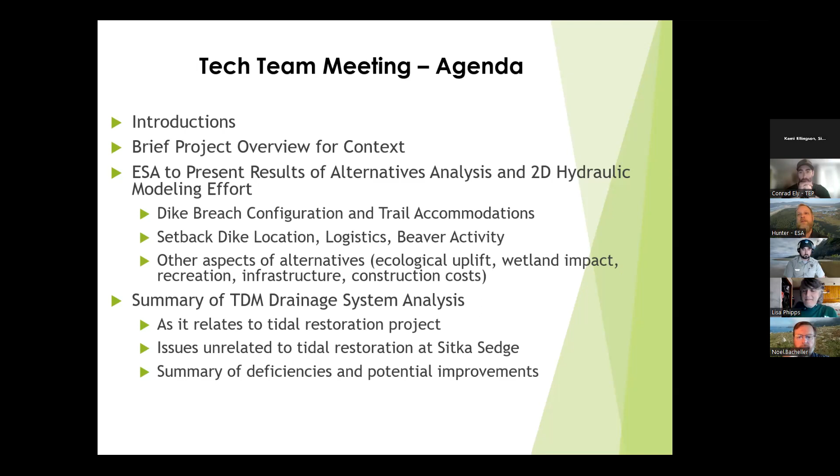We'll also cover other aspects of these alternatives, ecological uplift and impact associated with them, how they affect recreation at the park, how they tie in and affect other infrastructure such as Sand Lake Road, and some rough concept level construction costs for a basis of comparison.

We've also performed a fairly detailed assessment of Tierra del Mar's drainage system, mostly to understand flow inputs for our hydraulic model, but also looking more broadly at some of the flooding and drainage issues that residents experience, and really to show how some of those are related to Sitka Sedge, and how a lot of the drainage issues further south in Tierra del Mar are not related to restoration, but want to look at this as a comprehensive project planning effort.

So like I said, I'll be going through this pretty quickly. Again, let me know if you have questions, and otherwise we'll have some pause moments to discuss.

The purpose of this project is really around the fact that the existing culvert and tide gate and dike are failing. The culvert, there once was a tide gate on this 4x4 concrete box culvert. The tide gate is completely missing now. There's also significant erosion, mostly around the culvert itself, but in some other locations.

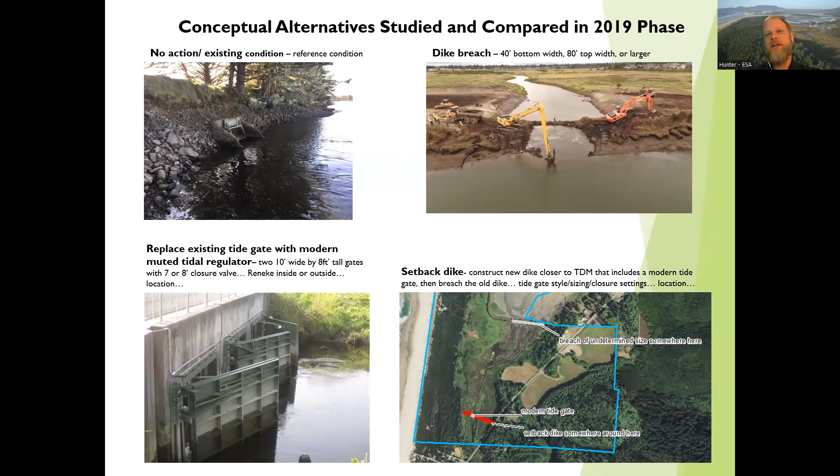We have previously studied at a high level some of these alternatives: the no action alternative of letting the tide gate deteriorate on its own, breaching the dike, a modern tide gate system, and a dike breach scenario with a setback dike in place.

The real purpose of this phase of work has been to advance the level of modeling used. Previously, we used a hydrologic budget model, known as the bucket model. We've now developed a 2D hydrodynamic model using HEC-RAS, and we're looking to refine the locations and details of key elements, namely the dike breach and the setback dike location.

We'll also look at additional potential site enhancements, such as tidal channel creation, filling some of the ditches, vegetation enhancements, and noting that Sand Lake Road has 3 culverts at Reneke, Beltz, and No Name Creek that will ultimately be replaced as well, but that's not directly a part of this study right now.

And as I said, we looked at Tierra del Mar's drainage system, really as a look at how we input those flows to the model, as well as identifying some potential improvements that could be undertaken in the future.

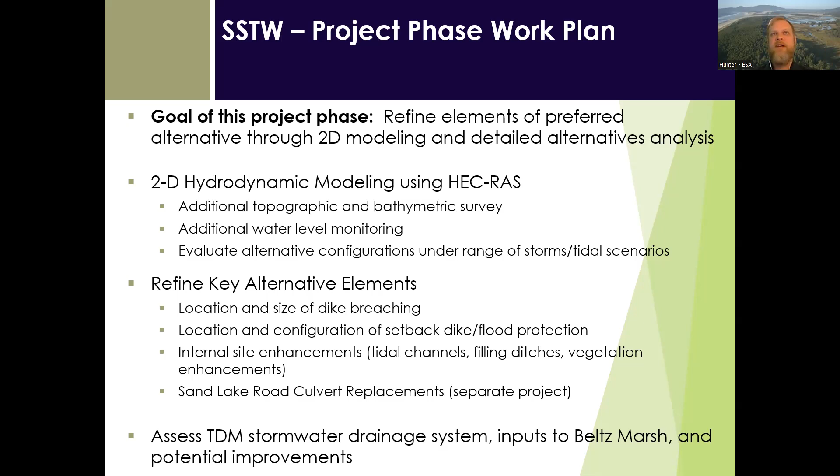Zooming out here on our concept plan, we'll be stepping through the presentation in this manner: first looking at the dike breach locations and how to maintain the Beltz Dike Trail, or the connection out to the rest of the trail network.

And again, looking at different locations for setback dike improvement at the south end of the marsh.

I'm going to go ahead and share some of the conclusions here up front. We've got a lot to talk through, but wanted to give some of these summaries up front so you all can start thinking about those, and really just not bury the conclusion here.

So what we've looked at out here on the outer dike is a 100-foot wide breach at the top, a 200-foot wide breach, and then full dike removal, really looking at a range of different ways to reconnect the marsh.

But noting that each one of these breach configurations needs some accommodation to maintain the trail. The Beltz Dike Trail is currently connected to the existing trailhead and parking lot and provides access out to the whole rest of the trail network.

These two 100-foot and 200-foot breach options could feasibly be spanned by a pedestrian bridge and really just leave the dike trail where it is.

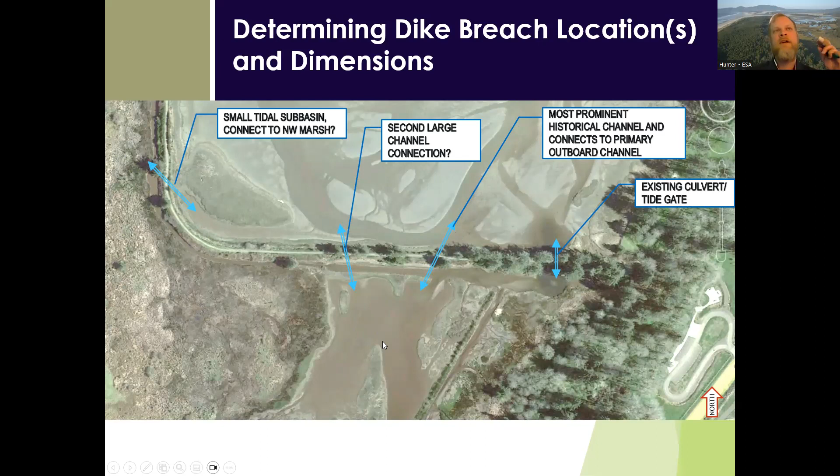We do see further to the west potential to do some smaller reconnection in the marsh, but a lot of this northwest marsh area does drain towards the center. So I'll show you a couple different views of how that will flow and function, considering additional breaches.

But again, really getting back to that question of predictability, and if we invest this money in the infrastructure, how to make sure, or how to protect it and minimize impact to it.

So stepping as far back in time as we could from a historical aerial perspective, we still see these 2 prominent channel connections that were covered by the dike, and again this eastern one really lining up as the primary channel.

Just a little more zoomed in view here. And then looking again at how the existing culvert and tide gate location is offset and not really aligned with what would be the primary trunk of this channel network.

Between these 2 - and this is getting into that question of multiple breaches and multiple bridges - York, your comment about removing the existing tide gate and culvert and spanning that, I think that's even more of a location where, if we had one bridge over the existing tide gate and another one at our primary channel, there's some risk in one of these locations filling in more and one of them scouring, so less predictability or more risk of changes occurring.

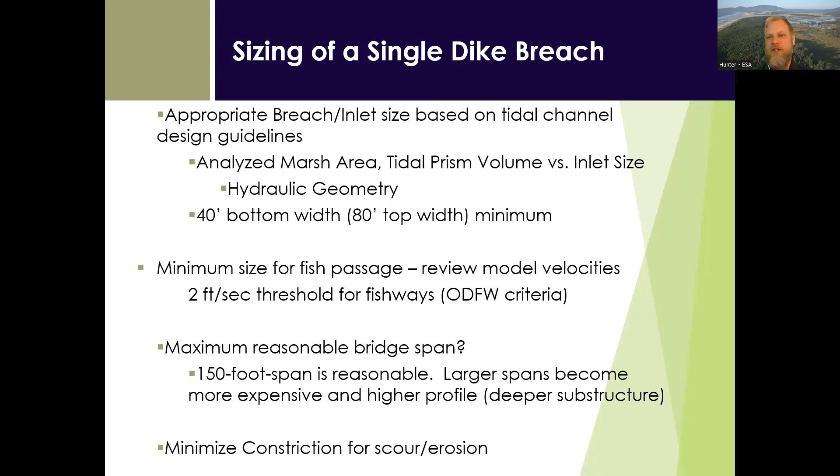Couple questions, Hunter. Yeah, go ahead. Cool. Chris, or York, go ahead.

Just one clarification, back to the levee breaches - I just want people to consider that a levee breach doesn't necessarily mean a channel. You're just removing fill, and you could put that area back to whatever natural grade it was without it being an actual active channel. I definitely get Hunter's point about stability and predictability, but I just wanted to keep it in folks' mind that a dike breach doesn't necessarily mean there has to be a flowing active channel through that location. Thanks.

Yeah, thanks, York. Chris Knudsen - Hunter, can you go back a couple slides? Yeah, that one right there. So I was just curious, there's a linear feature to the right of your arrows, your channel arrows.

Yeah, what is that? This is the drainage ditch that starts to show up really prominently in the 1950s aerial photos. That has been changing throughout the years with some of the ditching that has occurred, and how it's related to the timing of the dike. The dike was present in the 1939 aerial where this ditch really wasn't - I guess you kind of see the start of a ditch here - which kind of disappears in the 50s aerial, and then in the 70s aerial there's a more prominent, deeper ditch, not in this same location, but yeah, it is essentially a drainage ditch that's been cut, and we see that across the site.

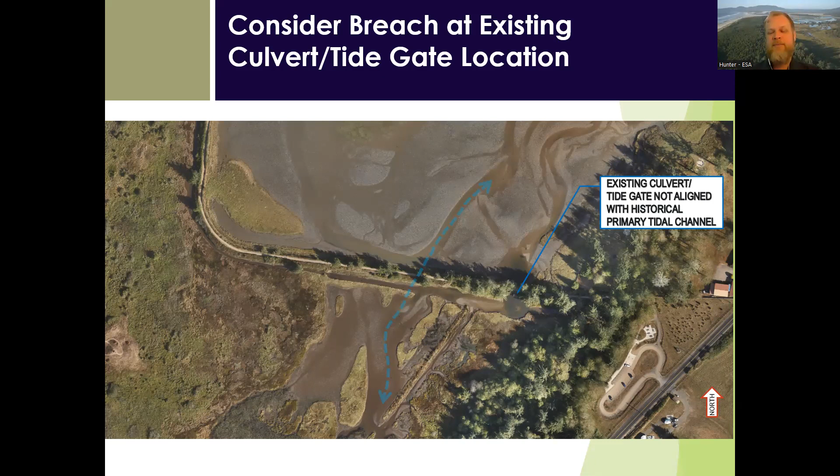No, I don't believe so. Like I said, if I could try to overlay these a bit better - there is a ditch network that kind of tees or comes together roughly where this road is, but then there's a ditch segment that continues to the north where the beaver dam is, a little bit further downstream to the north of this. So where would that road be in relation to alternative 1?

Here you can see a manifold of ditches all moving to the north, and then they combine into this east-west ditch that funnels them to the center of the site. I think that old road cut was right around where this east-to-west ditch line is. There's a channel segment that flows north where it's dammed up by the beaver dam, so the beaver dam has impoundment within this primary ditch and backwaters the ditch network as well. When I refer to the beaver dam, I mean the main beaver dam.

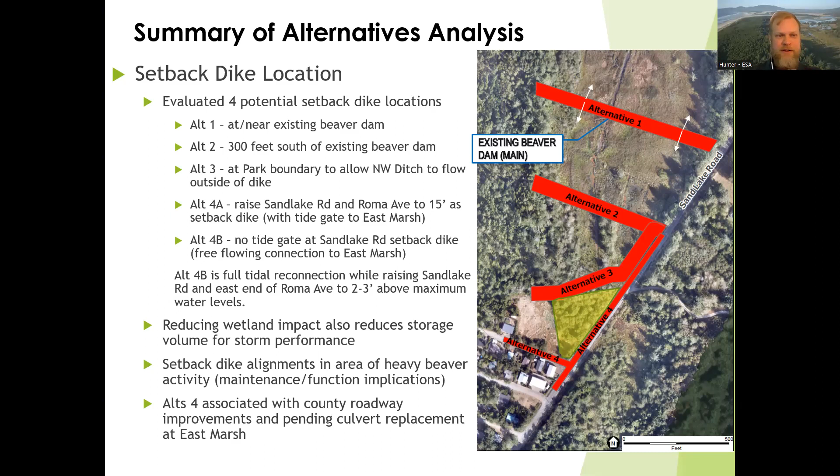While we're talking about that road, not to divert too much, but I'm curious, Jason Elkins, if this road appears in this photo. If you really zoom in, it looks like there was some sort of underpass beneath the roadway. We're pretty zoomed out here, but it does seem like there's some disturbance on this side, and apparently an underpass that would have connected into the marsh. I don't know if this was a cattle underpass moving out to the marsh, and if anybody has that knowledge.

I am not sure, it is interesting. I noted that the current residence I reside in now is not shown, or at least I can't really see it. There's a residence alongside the road, or a structure, a barn structure. But no, I'm not aware of any underpass that was there at all, or that still remains.

The old histories, the oral histories that were recorded, did indicate that there was an underpass in that location, so we do have record of that. The east side seems to have been filled in, and Malia and I were poking around there and pondering that as well, and didn't see any direct evidence of that now. Chris Lady, I don't know if you have or would be able to look into your records of any former bridges in this or nearby locations.

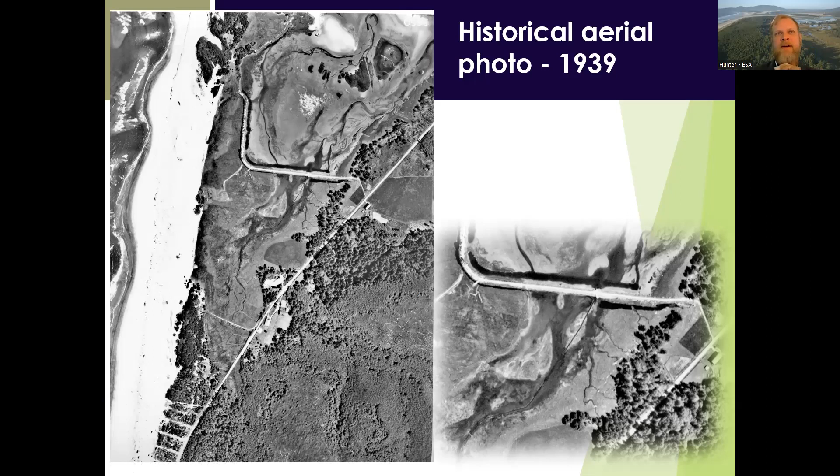York, you're making good points as far as, do you really want to fill that, or do you want to bridge that as well? And again, certainly...

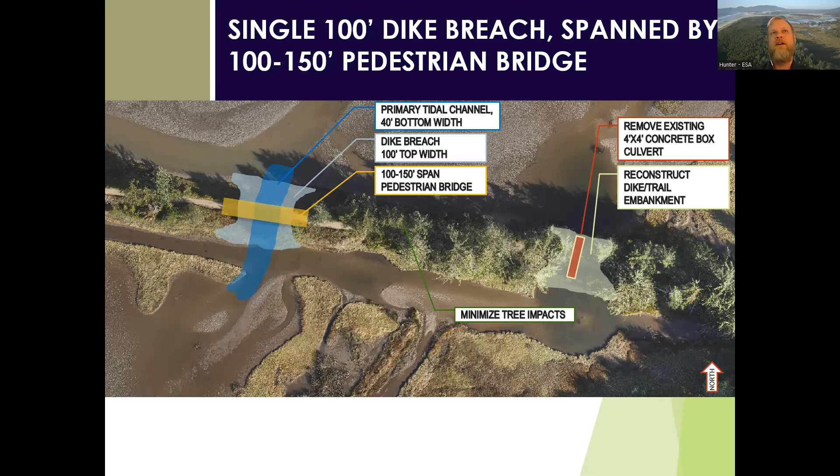Interested in hearing others' thoughts and opinions about these options as we look ahead. The predictability of nature has kind of driven our thinking on a single breach, and the ability to span it with a fairly large pedestrian bridge. These are a couple of representative examples in those span ranges, and then really looking at full removal, broad removal of the dike and allowing this to be more of a broad adjustable channel connection that could morph on its own.

But that would eliminate the trail that has been connected to this parking lot trailhead. This is what we're showing for a boardwalk option, just to start to get a sense of the scale of the cost, so we can think about the trade-offs associated with this sort of option in this location, or reconfiguring the whole trail network to run to the south around the marsh and potentially cross on a setback dike.

Thinking about where that trail would need to connect to, right now we're showing it tying in roughly to the Elk Knoll viewpoint area, essentially connecting to the trail network. A boardwalk, as I said, it's not just short span, short spacing piers that would be needed. There are some locations where we would be talking about a 100-foot bridge, boardwalk bridge over some of these channels.

And then again, comparing this to a similar system in the Nisqually National Wildlife Refuge near Olympia, where this one is also subjected to tides. You can see it's essentially out in open water during high tide, and then crossing mud flats and marsh at low tide. This is all pressure treated wood, and does have long-term maintenance implications.

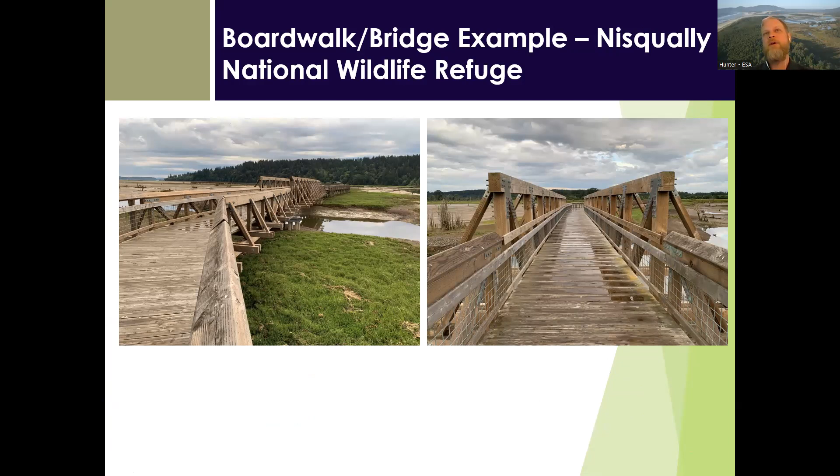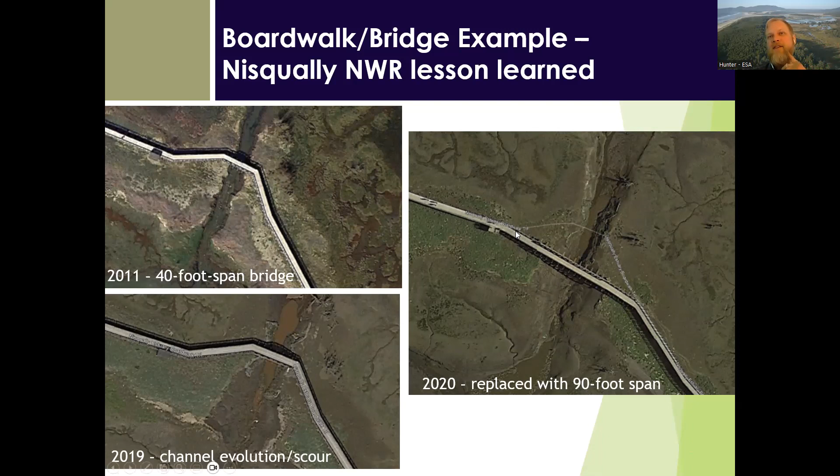This I did want to point out as kind of a caution of undersizing a bridge. This is what happened out there in Nisqually when they initially put in a 40-foot span bridge over one of the primary channels out there. 5 to 10 years later, they were seeing a lot of erosion in the channel, wanting to enlarge based on the new connection, and they have since replaced that with a 90-foot span bridge.

So again, seeing some of the stabilization measures that they attempted before upsizing the bridge, but even that, it is all wood. The bridge is a Western wood structure, and certainly has lifespan and maintenance implications in the future.

Chris Lady, I see your hand up.

So one of the things to mitigate that is typically when you do a bridge, you span right from the end of the abutment to the end of the abutment, and it is all open space.

One of the things that can be done to minimize that is you still have, call it a 150-foot bridge, but you keep 10 feet on either side of the abutment. That allows the water to do whatever maneuvering it wants to. So instead of spanning 150 feet, you end up spanning 130 feet, giving you 10 feet of buffer on either side. That helps to contain the flow.

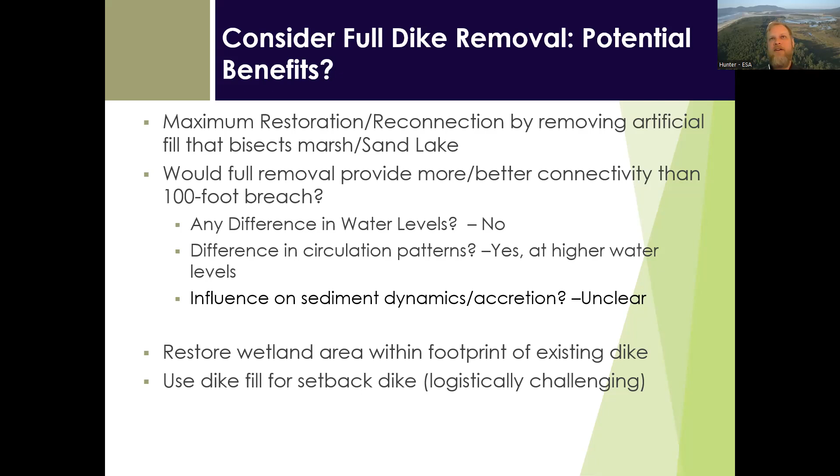York, your point about restoring wetland within the footprint of the existing dike is certainly a benefit. And is there a use for the dike fill material for the setback dike? That's logistically challenging from a timing perspective, since you'd need to build your setback dike before removing the outer dike. But in this case, because it's already connected, there are ways you could harvest material off this outer dike to build the new dike, if it were determined to be suitable.

The disadvantages of full dike removal are, the impact to the trail is the big one - what it would mean to reroute the trail, reconfigure the trail network relative to the trailhead area, parking, boardwalk, and everything that goes along with that, and really the cost.

It's hard to deny the massive difference in cost under a full removal and boardwalk option. I'll get into more of that, but for a boardwalk of this size, ranging from pressure-treated Nisqually style to PermaTrak concrete boardwalk, we're talking $3 to $5 million - let alone just excavating and hauling this material away, which is in the $1 million range plus. Compared to a 100 to 150 foot pedestrian bridge, which could be on the order of $500,000 to $1 million, depending on foundation and material type.

And then there are impacts to trees on the existing dike. If you do remove the full dike, what does that do to the potential for wind wave erosion off Sand Lake, changing fetch distance across the open water, and potential changes in vulnerability to the south end of the marsh? Kami, you've got your hand up there.

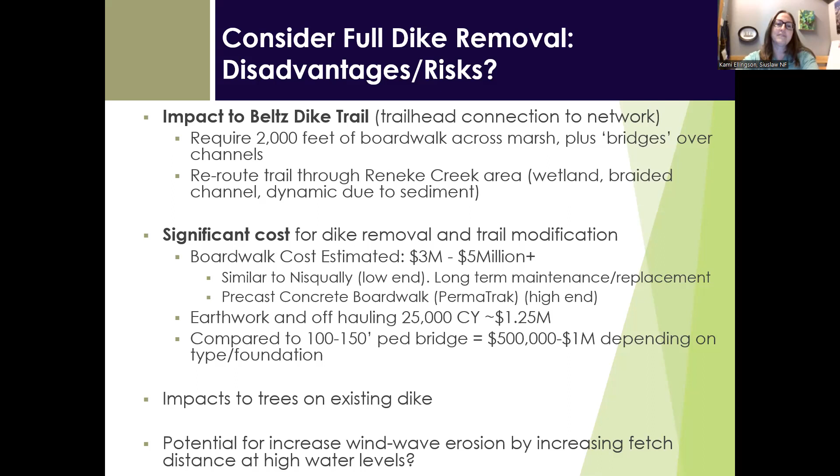So it's going to be a continual chasing of our tails to link those two. And you're going to have the same kinds of issues with the boardwalk as well, just because of how that's going to impact things, and the cost of maintaining that.

That's a good point about these two actions being linked, the full removal of the dike, with the question being how do you maintain the trail under that scenario. But I did break this down in cost for just removing the dike itself and off-hauling that material. We're talking about 25,000 cubic yards of fill comprising the dike. If we were to take it down to about 7 feet, the rough marsh plain elevation out there, that being a little over $1 million, round numbers.

But even if it's not the boardwalk replacing the dike in the location we've shown, kind of spanning the mid marsh there, if you do remove the dike, assuming you want to maintain connectivity to the rest of the trail network on the west side, you have to reroute the trails, whether that be through the Beltz, or through the Reneke Creek area. This is a very interesting zone, as Reneke Creek has moved itself down here and is sorting sediment.

Conrad and I were out there the other day seeing a ton of fish and really interesting conditions developing down there. But yes, you could certainly route the trail on high ground, or some of this would likely be boardwalk, route yourself through the Beltz Creek area and out onto a setback dike. There may be a different way to reconnect the trails, but we're still talking about a lot of reworking, likely a fair amount of boardwalks across some of these wetter areas.

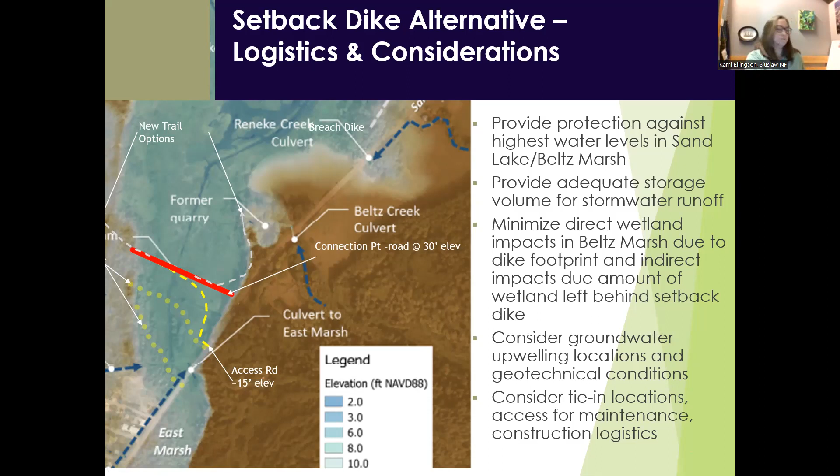I really appreciate all Kami's comments and agree. But to get back to the alternatives, something to consider: we keep talking about the cost of this boardwalk, but there's going to be a cost of maintaining the dike too, and you can't forget about that. Maintaining a structure that's potentially beautiful and not as detrimental as a levee is an easier sale than fixing a levee with hard riprap and things like that.

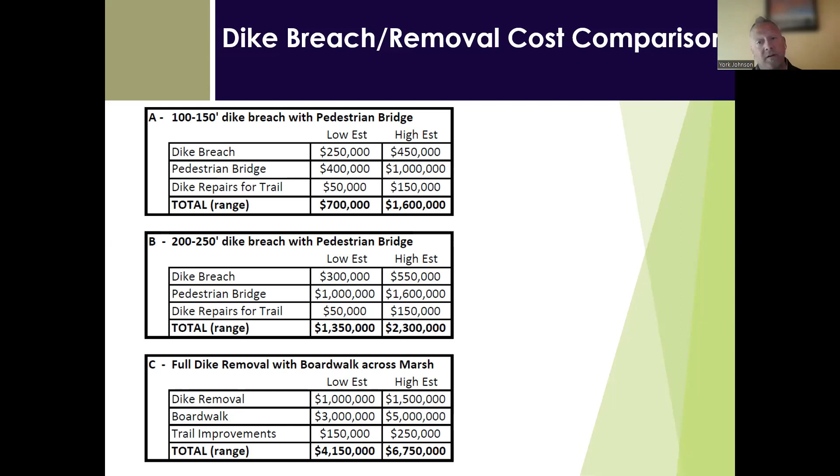Another thing I want to bring up is the levee removal and at what elevation do you stop. I noticed you put this boardwalk in a different location. Was there consideration of putting a boardwalk over a lowered levee base - maintaining the bottom 5 feet of the levee, or whatever engineers think is good, and putting your boardwalk across the old existing levee, utilizing that to a certain extent?

And to get back to Kami's point, I want to see this restored to the most natural state possible - that's really what's going to benefit water quality. If a 150-foot span bridge is reasonable, I would like that to be talked about over a 100-foot span bridge. I really like the amount of thought that's gone into the planning and consideration, but I think we should try to utilize any option we can think of moving forward.

Thanks, and just real quick on considering a boardwalk across the existing dike interface - the thought was pushing it further south to reduce its exposure. Under this alternative where we're removing the dike, this outer area where there's some rock on the outside now has more open water and wind wave action out there. I think the big thing though is the potential for the channel connections to evolve.

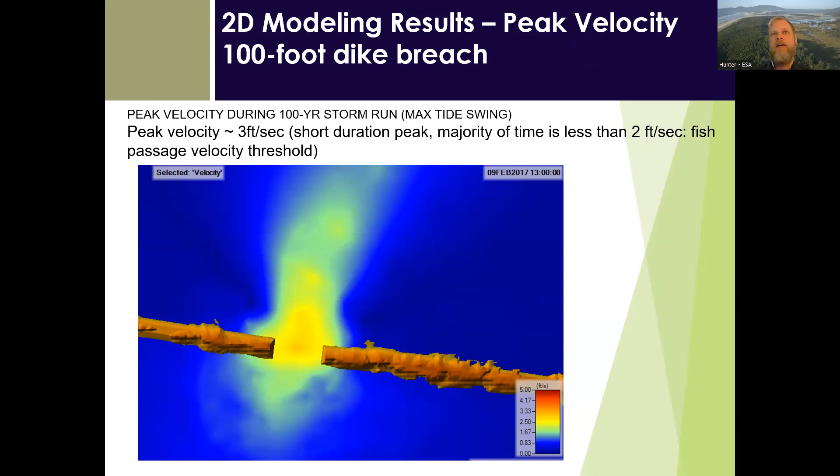What we are seeing for peak velocities under these different breach scenarios. We've changed the scale to really highlight the difference in velocity. This is at the absolute peak moment during the 100-year storm and a maximum tide swing drain out. We get 3 feet per second velocity peak through this 100-foot breach opening.

Again, when you zoom out and look at this constriction, it certainly does look like a small breach relative to the whole interface that water could be moving across, but the velocities are still quite low.

Looking at this from not only velocity but shear stress, which would drive erosion, we're comparing this to 0.19 pounds per square foot of shear stress. That shear stress has the potential to erode gravels, coarse and medium gravels.

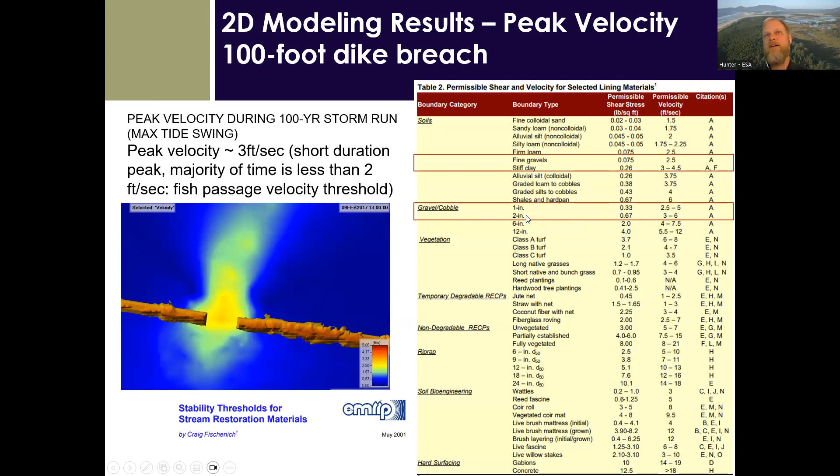As we start to get into higher velocities, around 7-8 feet per second, that's when we really start to get into riprap armoring and things like that. In the range of velocities we're talking about right now, it really has the potential to mobilize gravels, which leads us to think we wouldn't have to armor this very much, even with a 100-foot dike breach.

Looking at a 200-foot dike breach, so doubling that size, peak velocities through the opening are less than 1 foot per second, even during that full simulation of drain out.

One big factor there, as I mentioned, is that Sand Lake never drops below 5.5 feet. So we're only seeing the upper half of the tide cycle, and we really don't hit even the steepest part of a tide cycle drain out, where you often get some of the strongest forces. It just doesn't occur in Sand Lake because of the various bed features between this dike and the outer marsh, which retain water back—it never lets water fall below that 5.5 foot level.

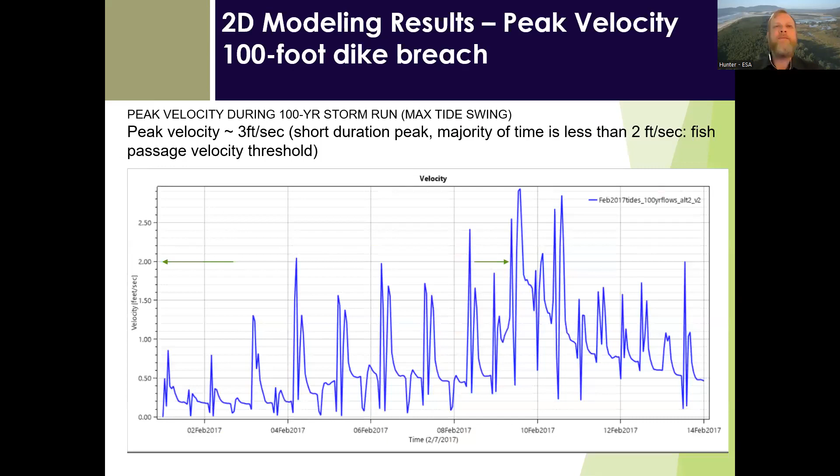Yeah, basically what I'm saying there is that the 100-foot breach itself is big enough to allow water in. Yes, it is a neck point, it is a constriction, but it's big enough of an opening that it allows water levels to equilibrate. So the water level that you see out in Sand Lake propagates into the marsh with the 100-foot breach.

For example, with the existing culvert that's out there, a 4 foot by 4 foot culvert, that constriction is small enough that we don't see the full tides propagating back into the marsh. But with the 100-foot breach, we do see full equilibration of water levels and no difference in upstream water levels in the marsh between these different breaching options or removal options.

Gotcha. Okay. I don't have a for sure answer on the circulation question, but I was looking at that and thinking about sediment movement and seeing some of those eddies that are predicted would make me think that you'd have areas of deposition, much more heterogeneous, like little bars and points of deposition behind the existing dike than you would in the full breach scenario.

But yeah, I mean, our company has done a lot of work in the San Francisco Bay, and really in a lot of these berms are actually used to slow water down and create these slack water zones that may encourage sedimentation or encourage sediment dropping out, not uniformly.

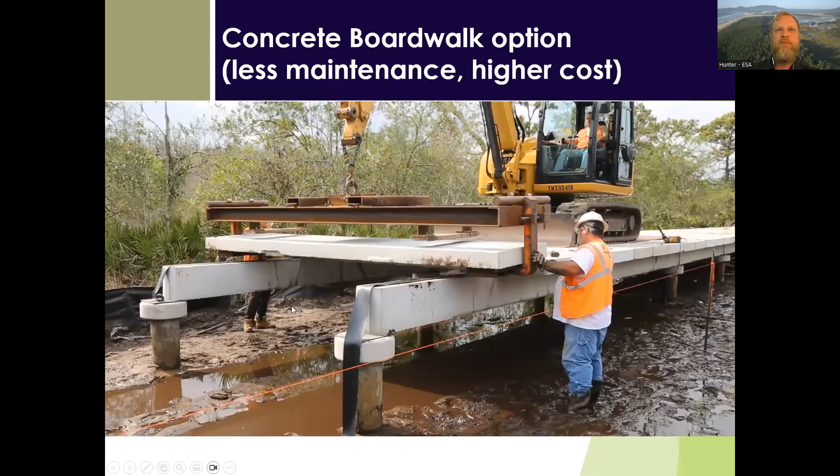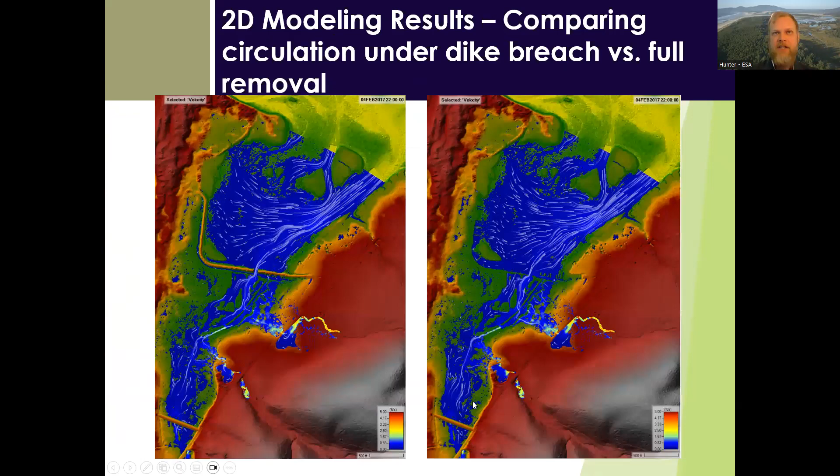Reneke certainly is the biggest contribution to freshwater in the marsh, but what we see in the modeling is that these higher water levels, even when you do have the 100-year flows filling the marsh, are ultimately limited by the outboard tide levels. The water flowing into the marsh from the tide is substantially larger than the volume of water the creeks are contributing, and Reneke is contributing the most of that.

But to directly answer your question, no, we didn't model the difference of how the dike and marsh areas would be affected by rerouting of Reneke. Once you've made the substantial breach connection, the dynamics in the marsh are really driven more by the tides, the in and out of the tides, than the inflows from the creeks. The big influence the creeks have is when there's a dike in place, or impoundments that can fill up with fresh water. But once you've made this open connection to Sand Lake, the exchange of tidewater really dominates, and the creek influence becomes less.

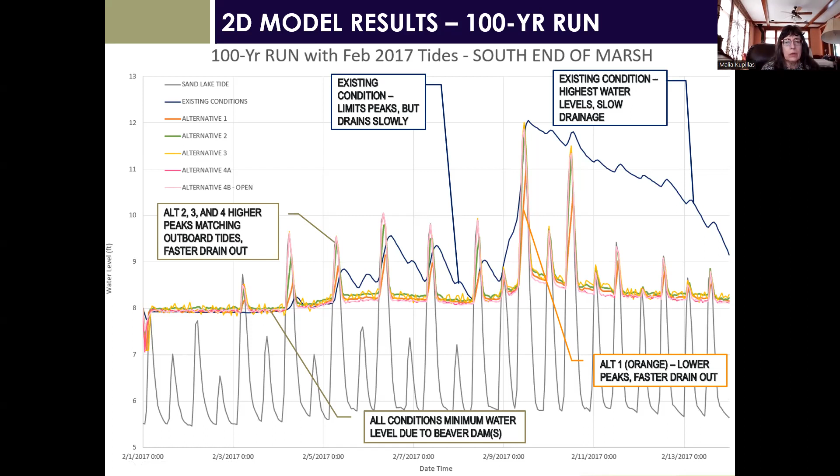Absolutely. We are looking at a separate study right now of alignment of Reneke Creek, really replacing the structure and the road overtopping that occurs there now. Working on that along with an assessment of the historical alignments of Reneke Creek, the high flow pathways, and the habitat value developed downstream of the road where it's flowing now, as well as looking at other historical options, including what I'm seeing as more of a ditched version of Reneke Creek that used to run along the parking lot and out a culvert through the dike.

But that's potentially a whole separate conversation. And again, as far as where we're talking about the setback dike locations, it's really unrelated to Reneke Creek, which I think we should transition into as I'm watching our time slip away here.

Hopefully that did answer some of your questions, and feel free to let me know if there's additional things you want to discuss or look into there.

Cami? Yeah, I'm glad I let Malia go first because mine was about Reneke as well a little bit, and then I want to go to the slide where you show the velocities with the dike breach.

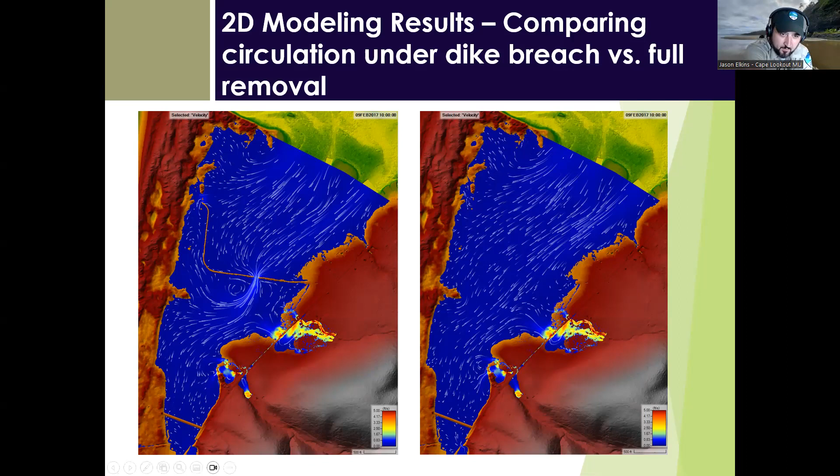Just a couple quick notes on that channel of Reneke that was created to bring the creek to the other side of the dike, the estuary side. Of note, local property owners said it would flood their property quite often when it historically flowed on the north side of the dike. So just food for thought.

And there were salmon in Reneke Creek over this winter in December. It was pretty cool.

Conrad and I were out there last week poking around this area downstream of Sand Lake Road, and we saw a ton of fish both downstream and immediately upstream. We even saw them dashing through the culvert, not apparently going much further up where we were seeing, but a lot of fish, apparently salmonids, in this area now as it's developing.

Also a very dynamic area. There's a ton of sediment sorting taking place here, and the channel really braiding out, with some beaver activity helping that along. Yeah, really an interesting area, and a whole other topic to dive into at some point.

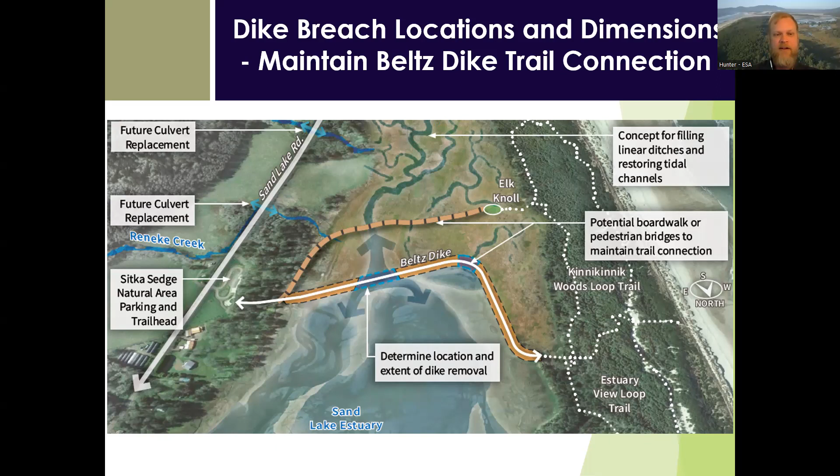In the interest of time, I know we've talked a lot about the dike breach and what happens there. I do really want to focus more of the conversation on the setback dike and what we've looked at there. I don't know if we got any indication of folks signing off at noon versus sticking around another hour, but I'll try to get through the findings and some of the other complications around this setback dike and new structure, then have additional discussion.

The big reason why I wanted to evaluate these different setback dike locations is around understanding the impact to the wetland of creating this dike, and looking at whether there are other less impactful ways to create the setback dike and have it still function the way we need it to.

So starting with this location on the setback dike, or excuse me, on the existing beaver dam. There's a lot of fine detailed logistics of whether it's on the beaver dam or downstream of the beaver dam, et cetera. But that's the location that had been initially identified and evaluated at a high level of feasibility for storage.

These other ones push the dike further south. Alternative 3 is actually configured such that the northwest ditch coming out of Tierra del Mar would flow outside of the setback dike.

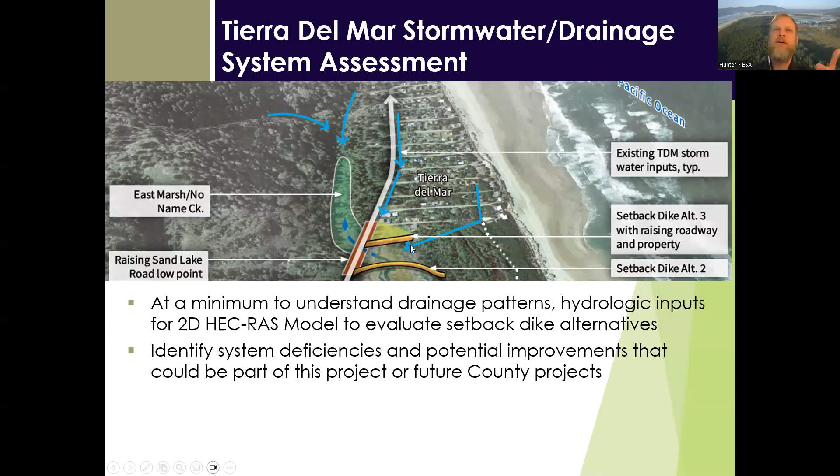Just for reference, there are some key elevations here. The 100-year flood level is 11.8. All these are in NAVD 88. Sand Lake never drops below 5.5 feet in its current state with the sand bed features. The beaver dam here impounds water behind it that never drops below 7.5 to 8 feet. So the south end of the marsh is essentially always ponded at those levels, 7 to 8 feet, depending on inputs.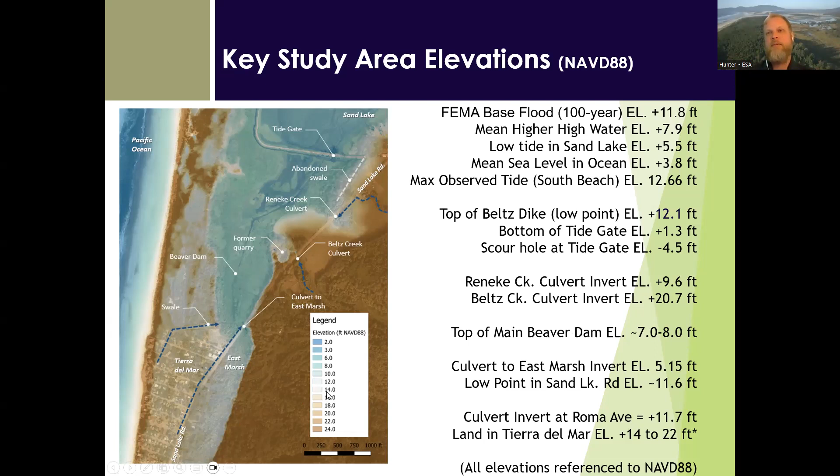And the low point in Sand Lake Road at the East Marsh crossing is 11.6 feet. So when we talk about these 12-foot tides, they would potentially overtop that low point in Sand Lake Road. When we look at performance of the setback dike, we're also looking at how much water would build up behind it and what that water surface elevation would mean for Sand Lake Road, as well as further back in the East Marsh and the northern properties in Tierra del Mar.

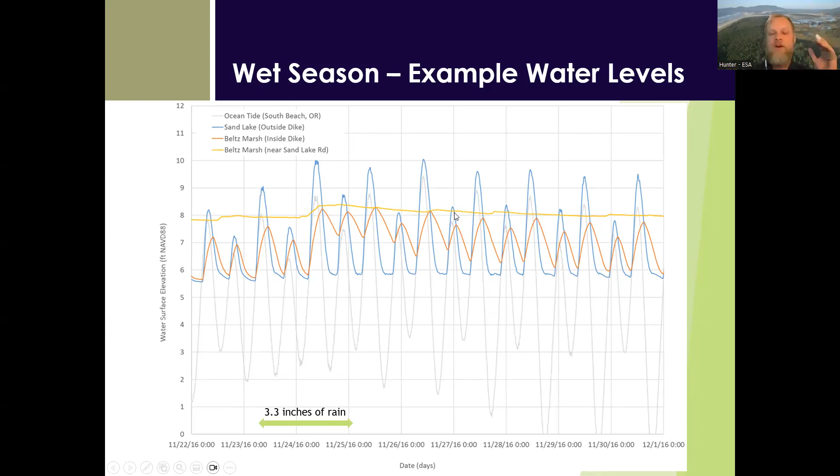Really important to note here. And then during wet season, it doesn't change that much, but what we see is with the existing dike, when we get rainfall coming in filling the basin behind the dike, it takes a long time for the system to drain out. In the same way, the area upstream of the Beaver Dam, we see small peaks, but very moderated water levels upstream of the Beaver Dam.

This is some current data from the most recent February king tides. It wasn't that exciting from a stream flow perspective, but what we did see was that we're seeing tides in Sand Lake about 1.5 feet higher than the South Beach ocean tide. So Sand Lake levels do typically get higher than the tide stations that we look at. The East Marsh, where we put in a logger, is staying steady at 8.2 roughly, and that's essentially the backwater from the Beaver Dam, as well as additional impoundment at the Sand Lake Road culvert.

We did put one more logger out closer to the mouth of Sand Lake, and it does drop further down, but it still is limited. It didn't drop below 3. So we do see Sand Lake has several bed features moving up from the mouth to where we interact with it at Beltz Dike that impounds water and cuts off the lower half of the tide cycle. That's the main point there.

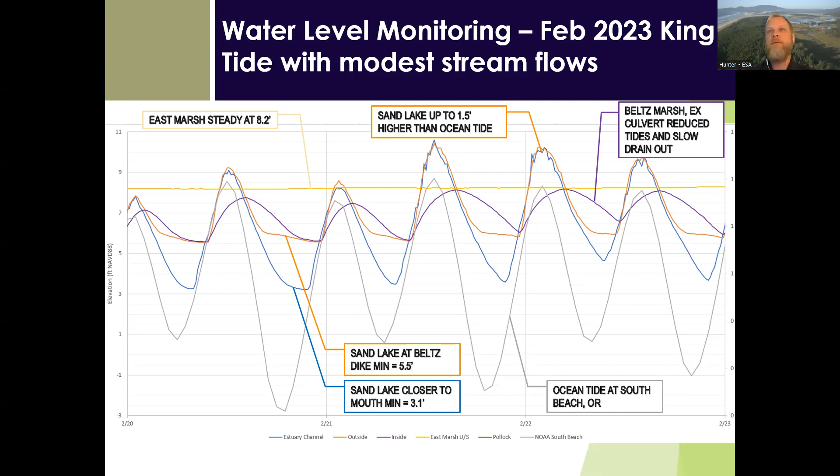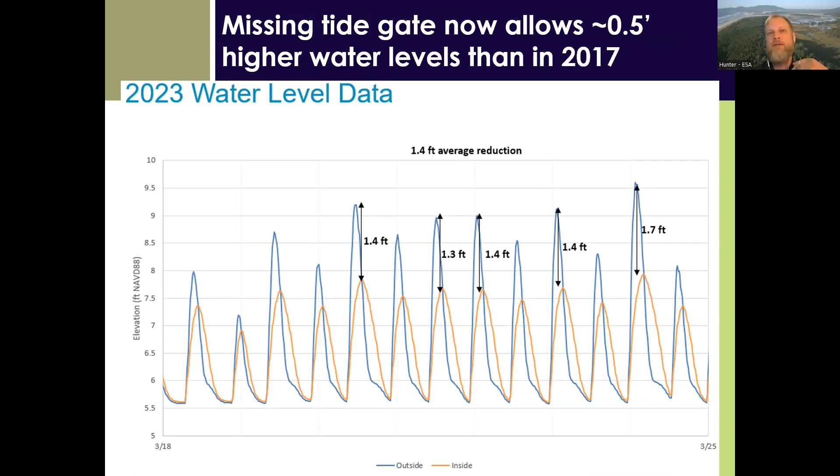Then this is just a quick analysis of the effect of the tide gate missing now compared to what it was in 2017. Back in 2017, we were seeing about a 2-foot difference in tide and water level in Beltz Marsh. And now with the 2023 water level data, we're seeing about 0.5 foot more water accumulating, or tide water getting in based on the missing tide gate. So it has changed some.

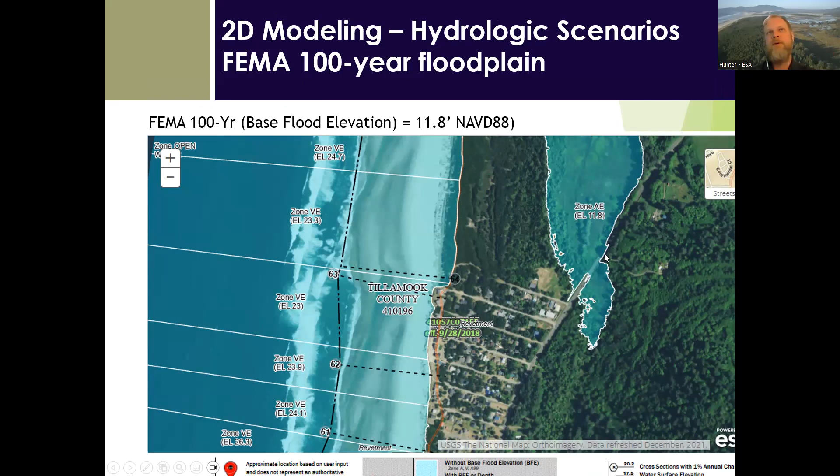I'll kind of breeze past some of this stuff. These are details about the hydrologic scenarios that were developed related to the 100-year water surface elevation. So 12 foot is this peak water level that we're really focusing on, although noting that max tide at South Beach is reported as 12.66, and noting that Sand Lake tides have been 1.5 feet higher sometimes than the ocean tide.

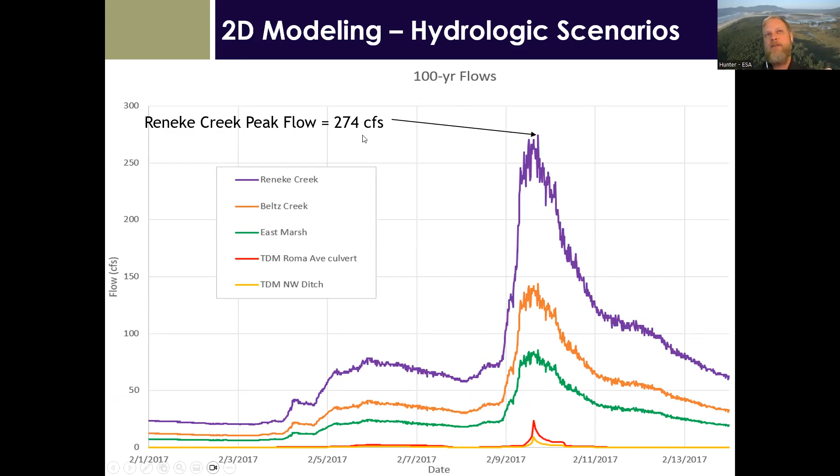13 is really what seems like the max extreme tide to consider in Sand Lake. So I'll show you a little bit about some inundation extents under those scenarios, but 12-foot king tides with all these big 100-year storm flows. We took real stream flows, we scaled them up based on nearby stream. We're tracking our Reneke Creek 100-year peak flow at about 274, comparing that to StreamStats at 238. So we may have a little bit more extreme 100-year flow event taking place, but I think it's just a more conservative approach.

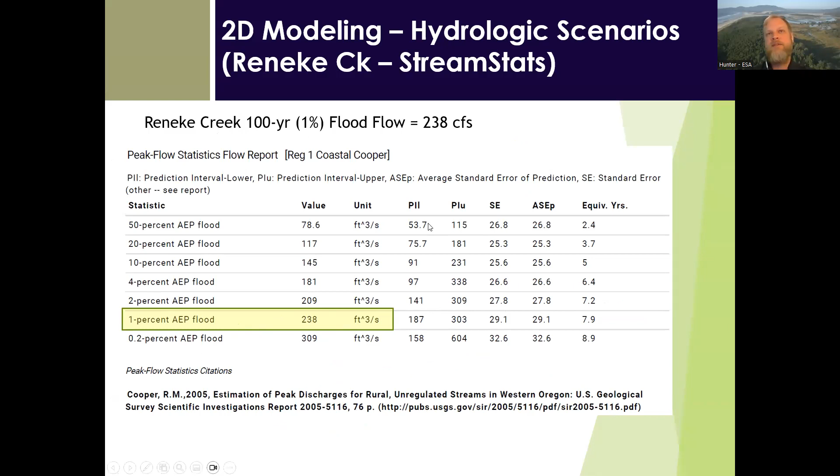And StreamStats is a rough tool, it's not always that accurate. But we do feel good about the fact that we have created this very extreme event to run these model scenarios through. Again, these are kind of wanting to compare it to existing conditions, and existing conditions, as we've talked about in previous phases, is the worst condition possible for drain out and handling storms.

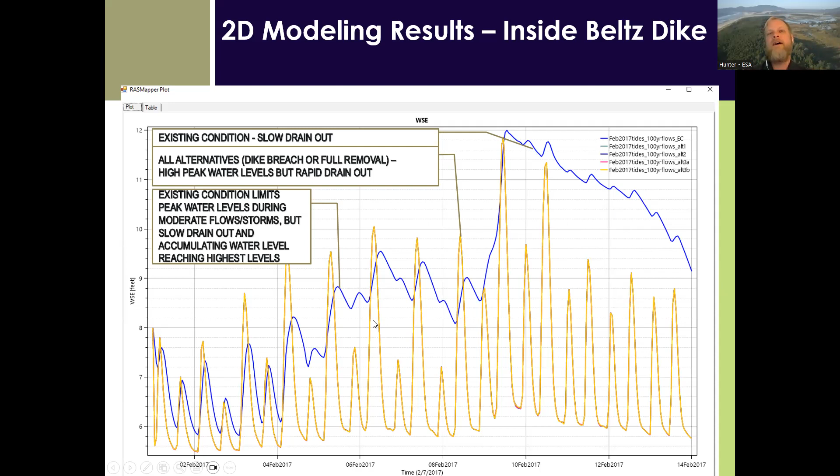What we see even leading up in this event, the blue line here being the existing condition, is that the existing dike does limit tides when there's not a storm taking place. So there is some protective value of the existing dike and culvert with no tide gate. But as soon as we start to get substantial flows, the existing condition fills with water and takes a long time to drain out, particularly once we hit this 100-year flow level. It takes days and days to drain out. So essentially all configurations that we looked at perform better than the existing condition during a big storm event.

Looking back at this earlier portion of our simulation, we see the existing conditions do limit the peaks that occur. When we compare this to the fully unrestrained, fully reconnected option, the existing dike and the setback dike, the goal of the setback dike is that it would also be limiting those peaks.

There's a lot of information here, so I'll try to hone in on this being essentially a 2-year storm, the first storm of our 100-year run. Each one of these lines is a different version of the setback dike. As you would guess, this orange one that maintains lower water levels really limits the peaks, and once the tide drops, it drains out immediately, really fast. This is alt 1, the setback dike near the existing beaver dam.

What we've seen in the modeling is that this location performs really well. In most cases, very similar peaks to existing conditions or better, as far as peak water levels. All of the options drain out very fast compared to existing conditions. As we push the setback dike further south, we reduce the volume of the storage basin, and we lead to higher peak water levels, whether it's the tide that causes that peak water level, or when the tide gate is closed and fresh water pours in, it will generate that same water level.

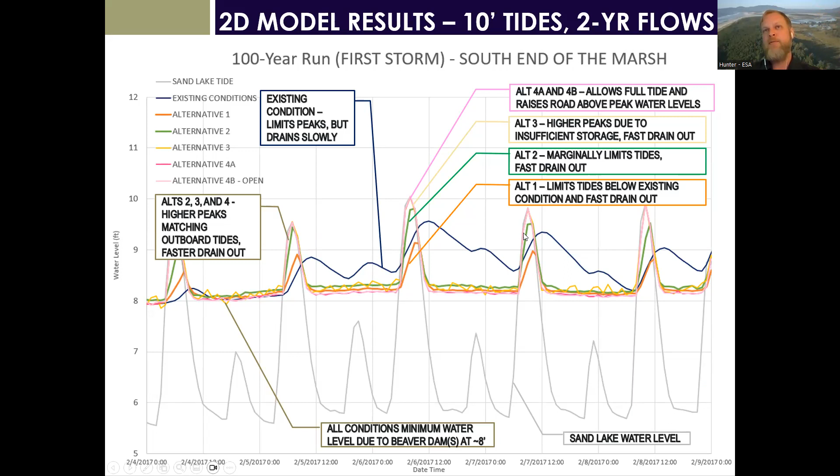When we look at the 100-year event, again it's this orange alternative 1 setback dike that truly reduces water levels compared to the existing condition, and all of the other setback dike locations fill up quickly.

Alternative 2, we've pushed it back 300 feet. It has some tide-limiting effect, but does still get higher than existing conditions in this case. As we push it further back, it's essentially allowing the full tide to occur, because the basin fills in with fresh water and results in the same peak water levels anyway.

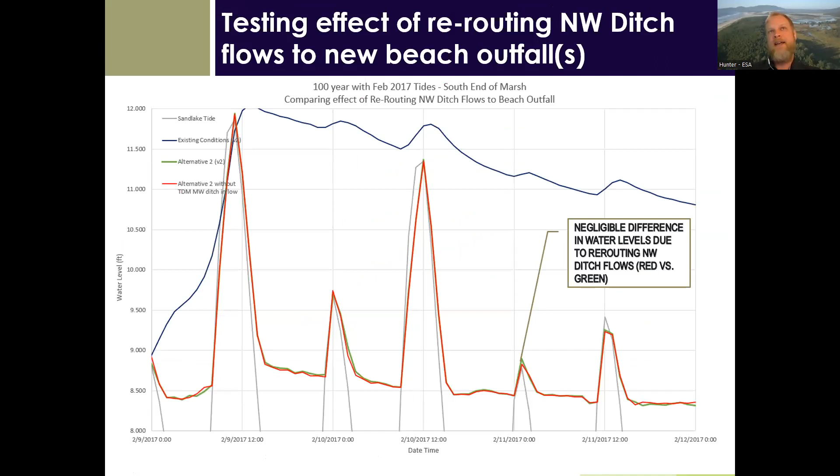Rerouting the northwest ditch has no effect. I'll go past that unless anybody has specific questions.

All the data I was just showing you was essentially water levels at the south end of the marsh, just downstream of the Roma Ave culvert, or just downstream of the East Marsh Sand Lake Road culvert. We also looked at water levels in the East Marsh, and compared to existing conditions, that shows a similar effect and even more extreme.

Water fills in this basin and just stays ponded for days and days at a time. Whereas all these setback dike options, assuming that the Sand Lake Road culvert at the East Marsh is upsized and allows exchange across that road interface, we see similar things: the peak tides occurring and really fast drain out.

The floor on all of this data is essentially the beaver dam elevation. Because of that impoundment, assuming it persists under each of these options, water levels at the south end of Beltz Marsh near Tierra del Mar do not fall below 8 feet, particularly during these big storms.

York, do you have a question?

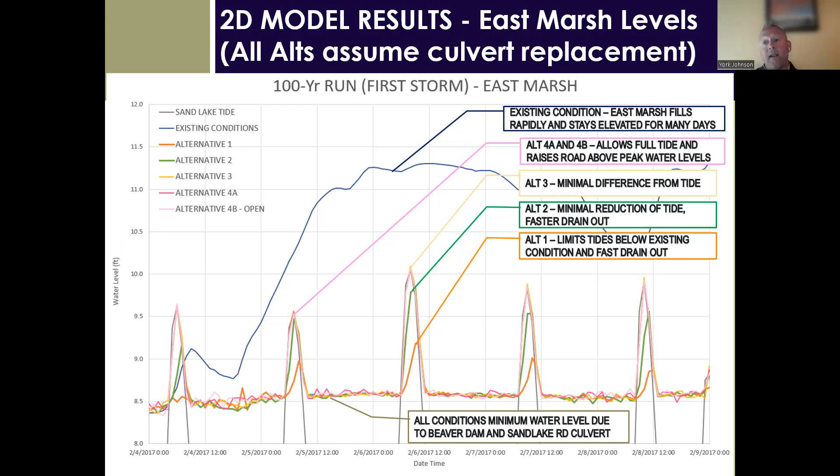I would assume you're going to set that tide gate at a lower elevation at the beaver dam. Is all this analysis you're talking about taking that under consideration, or are you not? Are you going to set the tide gate at similar elevations to the current beaver dam?

Yeah, that's a really great question and a logistical challenge, and that's what I want to get into as well. How would a new setback dike interact with this existing beaver dam? I definitely have slides that cover this, as well as the functionality of culverts and tide gates around this beaver dam and the MTR settings.

This is also a complicated question because an MTR, as folks are hopefully familiar, is allowed to close once a particular water level is reached. In this location, this is pretty unique for MTRs. We would essentially set this MTR to about 8 feet or even higher, where the gate stays open most of the time and only closes at the very peak of relatively high tides.

Getting at this topic of the elevation of the culvert, do you set that culvert lower so that it's underwater, impounded, potentially if it's upstream of the beaver dam and the beaver dam remains, it's always backwatered to 8 feet? So there's kind of this ineffective capacity. You can lower that culvert, but if it's backwatered at 8 feet, it's not really flowing at the bottom half of the culvert.

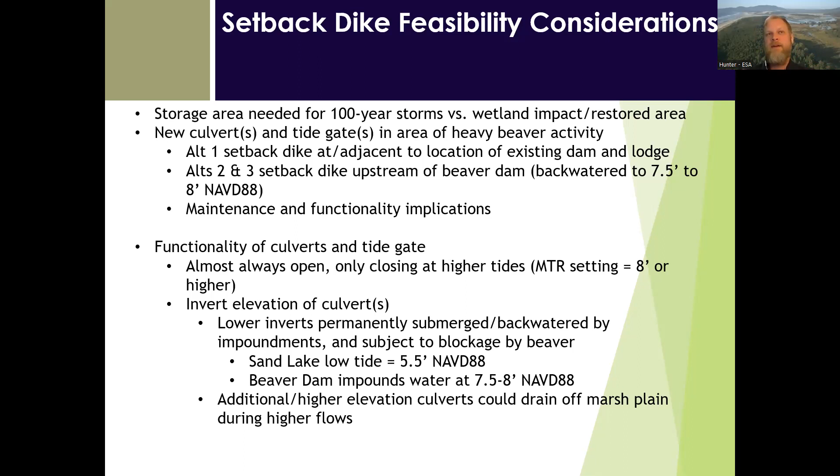That's one of the big points here: even with the amount of tide, yes, full reconnection or the breaches would allow higher tide levels and more salinity and more tide water to interact with the site. But with a lot of the research taking place in the Skagit River and in Oregon, the Yaquina and Miami River, we see beaver activity in these tidal areas that have salinity influence.

So I think we've got to assume that the beavers are going to be here after a setback dike goes in. A lot of our modeling is really focused on these extreme events and highest water levels, as far as looking at flooding and drainage capacity and things like that. So the assumption in the model is that water is impounded at these levels.

There are logistics, even in this channel here—yeah, you would likely sink your culvert in deeper so it has water in it all the time. But this downstream beaver dam is really limiting how much water can actually move through this channel until water levels are higher.

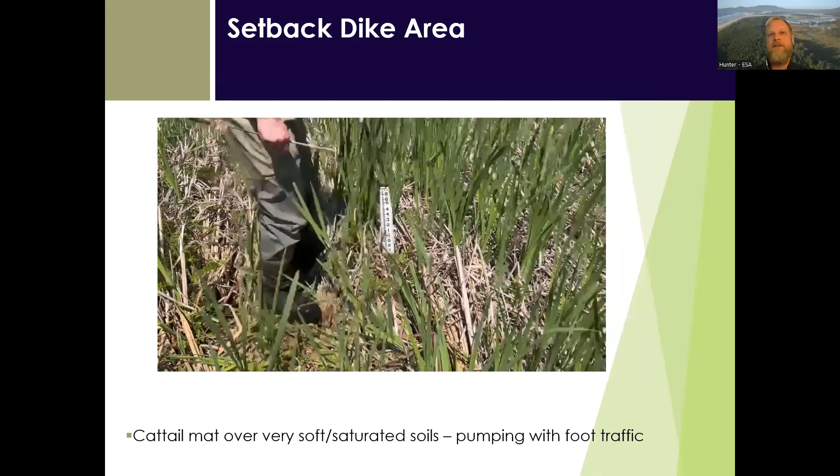So I don't know if I answered your question exactly, but yes, that's the base assumption as far as how these impoundments will operate in our modeling. But this is a big discussion that I do want to get into as far as beaver activity and how that will influence this structure in the future.

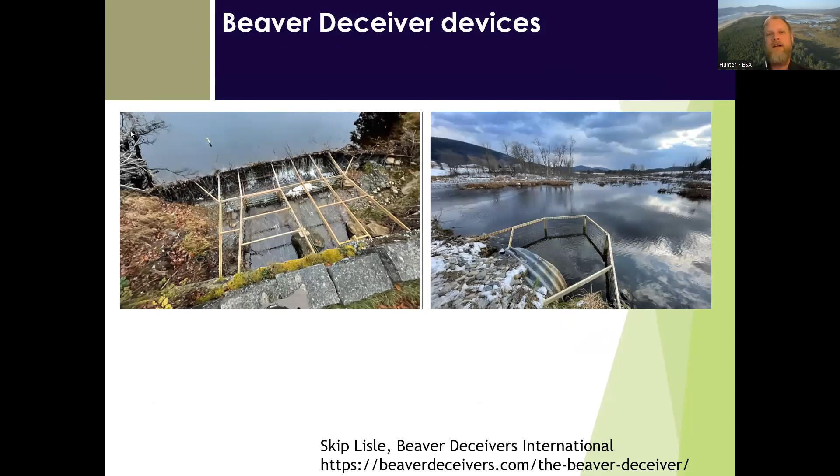Just jumping ahead a little bit, getting into what sort of exclusionary measures there are to protect a structure from being plugged by beavers. There's a lot of things being tried—giving a reference to Skip Lisle in Vermont, on the East Coast, Beaver Deceivers International, inventor of the Beaver Deceiver device. It is essentially exclusionary fencing that allows the culvert to stay free flowing and conveying water while excluding beavers from getting to the point of plugging your structure.

These are not foolproof, not maintenance free. They certainly rack debris, and beavers can essentially build a dam on this fence. I guess we need to all be aware that a setback dike, a new culvert, and a tide gate are going to have long-term maintenance associated with them to keep them flowing as we've modeled. The model is predicting full functionality of this new opening and new structure, and to make sure it does function that way well into the future, there is certainly a maintenance component.

I'll reference Smuggler's Slough tide gate near Bellingham on the Lummi Nation property. This is an MTR tide gate that stays open most of the time. It was built in a location of heavy beaver activity, and they're continuing to try different things, and honestly it sounds like kind of a struggle with it. I was talking to somebody about what they've done over time. The beaver packed about 20 cubic yards of mud around this structure to essentially seal it up, and they've done different things like adding exclusion fencing, uncovering it and clearing it out, and it's been a continuous maintenance issue for them.

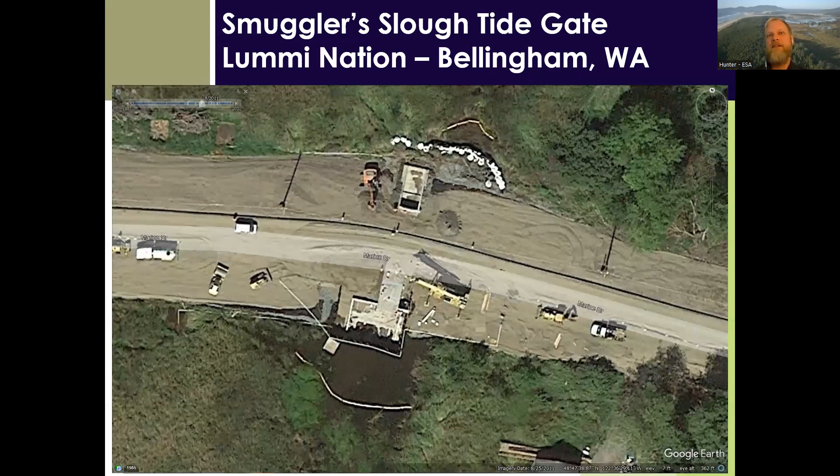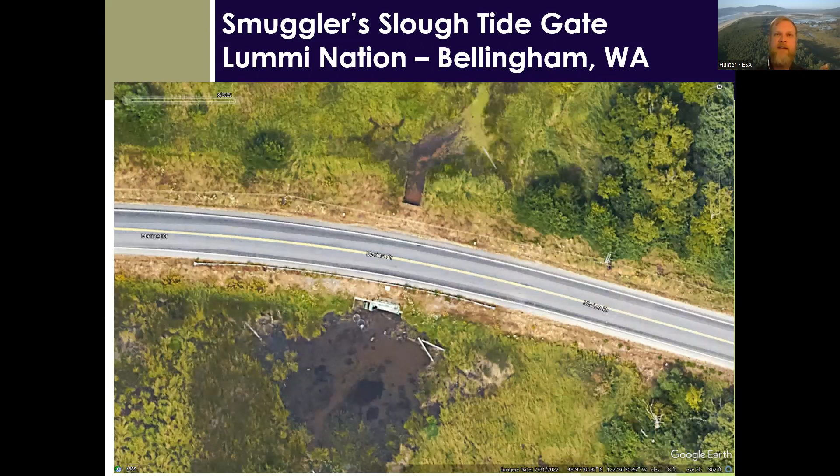So pointing that out, the setback dike location near the beaver dam has enough storage to contain all that flood water, and as long as it is maintained as free flowing, it will function that way. But there will be some effort required to keep it functional and clear. Honestly, a lot of the beaver exclusionary measures are somewhat experimental and require a fair amount of adaptive management and maintenance to keep them moving.

There's also fish passage implications for this sort of exclusionary fence. I pulled a couple of clips out of Greg Apke's presentation to the 2020 Beaver Working Group, where he talked about fish passage implications of exclusionary devices around culverts. The typical 6x6 square fencing is acceptable for resident trout. Once we start wanting adult passage through these areas, maybe into the East Marsh or upstream of a setback dike, for anadromous adult passage we want gaps between exclusionary devices more like 9 to 10 inches, and once you get to that spacing distance, beaver can move through those as well.

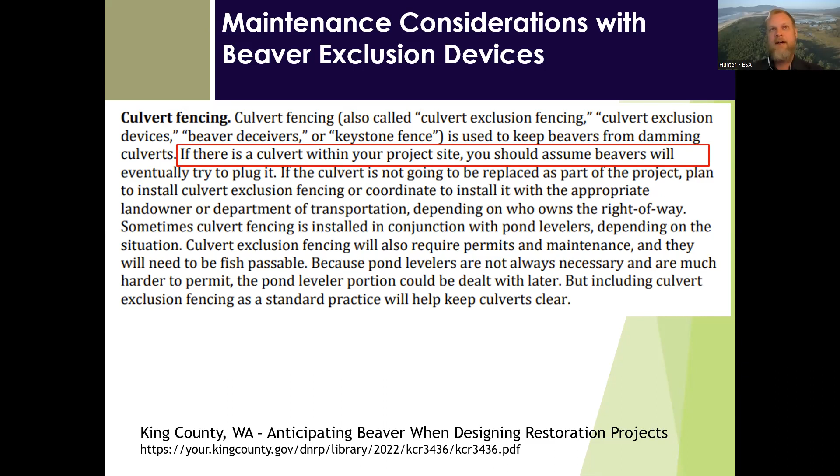Yeah, I don't want to throw you off topic, but I need a quick refresher here. So suppose we have a 150-foot dike breach in Beltz Dike and no setback levee. Can you describe real briefly what the infrastructure impacts would be from that? Yeah. So, as I said, we did look at that as kind of a point of comparison, understanding what it would mean before applying a setback dike.

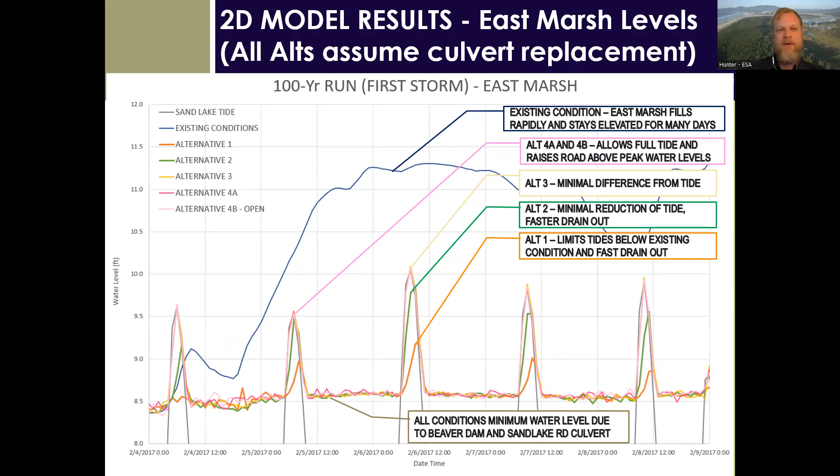So that's essentially raising up Sand Lake Road, which would overtop at 11.6 as the low point. There's a substantial portion of that road that would overtop at these higher tide levels. So what that would look like is raising up Sand Lake Road and even Roma Ave, the approach to Sand Lake Road.

I have another couple of graphics showing inundation extents at the 11-foot, 12-foot, and 13-foot water levels, which are essentially the high extremes that would occur today. You can see it inundates the eastern portion of the northernmost private property in Tierra del Mar, inundates a substantial portion of Sand Lake Road, and propagates back into the East Marsh, just starting to clip other small properties, though this more natural private property already has a lot of inundation ponded in many cases. This would essentially be the treatment where you allow those tides to occur and raise the infrastructure to handle that.

To very roughly paraphrase the groundwater modeling work from the previous phase: groundwater would actually have either negligible difference or slightly lower levels, because the existing condition causes so much ponding and prolonged ponding of water. But these high tides would still occur.

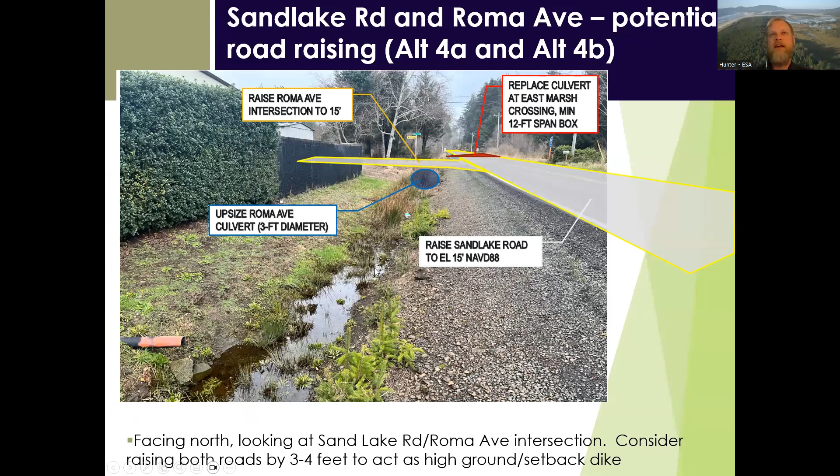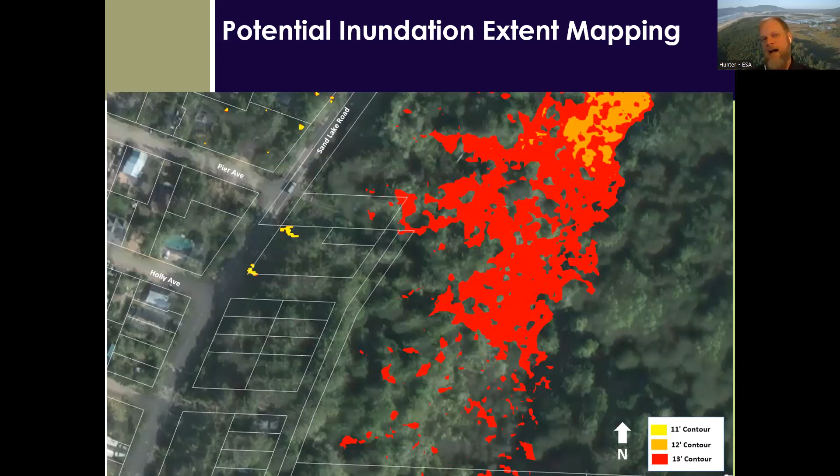I think we wanted to present this as really a starting point, a point of comparison: first you breach the dike, you apply this level of inundation, and then you start adding these setback dikes to block the tide levels and balance that with capacity for storing the water. Let me know if there's still remaining questions.

There's other considerations logistically about tie-ins to the road, and Chris, definitely interested in your thoughts on some of this. My biggest question is, by raising the road, do we impact the property owner on the north of Roma? No, not the property north of Roma here. So that northwest corner is what specifically I was looking at. No, raising the road wouldn't impact this property, but it doesn't protect this property at all.

I think that's, as we looked at, yes, you can raise Roma, the eastern end of Roma, and potentially more critically raising Sand Lake Road, the area that truly overtops during those tides, but that does nothing to protect this corner of the private property.

Raising the road wouldn't impact this property either, but it doesn't provide any protective value for this property. So raising Roma 2 to 3 feet is really only intended to match the elevation of Sand Lake Road. It's the taper to match, not so much raising the road, but to match Sand Lake Road.

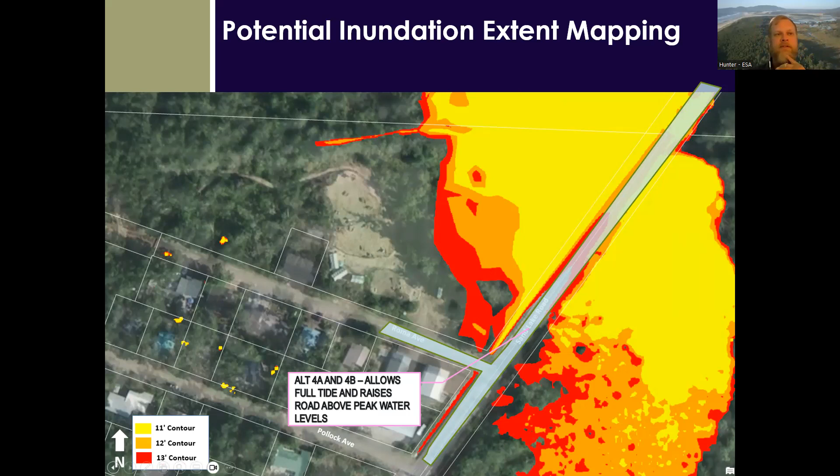And the Sand Lake Road raising, 3 to 4 feet, so we're talking about 11.6, or just say 12 feet. So if we raised it 3.3 feet at the low point, that's the maximum raising of Sand Lake Road at the low point. As we get further back here, we're really just tying it in, transitioning into existing grade. And you can see with even the 13-foot inundation, the red, Roma is not below 13 feet.

This piece is below 14 feet. So this is where those extreme high tides in the future could start to impact Roma Ave. And this shows even more, to raise Sand Lake Road and have the same elevation of access for Roma Ave, you need to raise this approach of Roma Ave, but not much, like a foot. It wouldn't be that 2 to 3 feet.

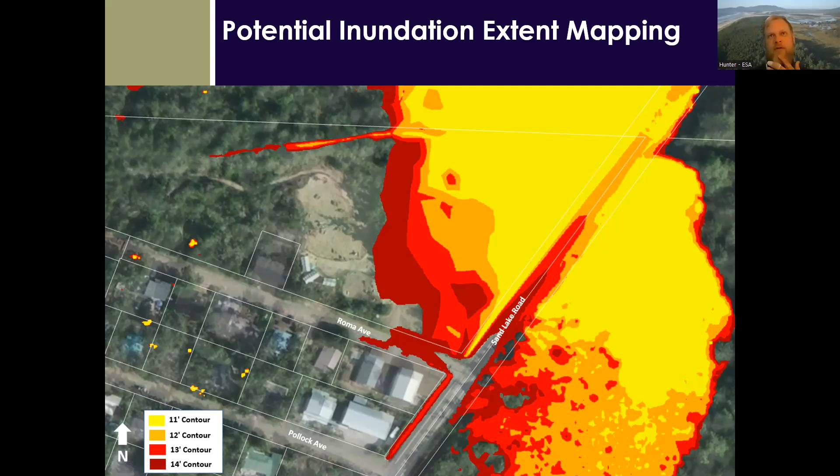My question is following up on Malia's comment earlier about if that culvert at Roma is backwatered, or if it's full of water from tidal inundation, how much does that impede outflow for water flowing down the Sand Lake ditch? And does that then make the Roma Avenue elevation function more as a dam that could backwater or back up water into the area to the south of Roma Avenue?

Yeah. What this would look like would be the bottom of this culvert is at about 12. So if we were to get that 12-foot water level, we would start to see the bottom of this culvert starting to get lapped by backwater. And certainly with 13-foot water levels, we're not only blocking water from draining out of the culvert, but we're actually allowing tide water to propagate up the Sand Lake Road ditch upstream of Roma.

If you upsize the culvert, you could conceivably make this culvert big enough and have enough headroom or clearance so that it wouldn't impede drain out of the Sand Lake Road ditch. But like I said, without any sort of tide gate on that, the high tide levels, 12-foot, 13-foot, do start to propagate back into the ditch. And you do start to see that in this inundation mapping, where this 13-foot water level does get back into the ditch upstream of Roma.

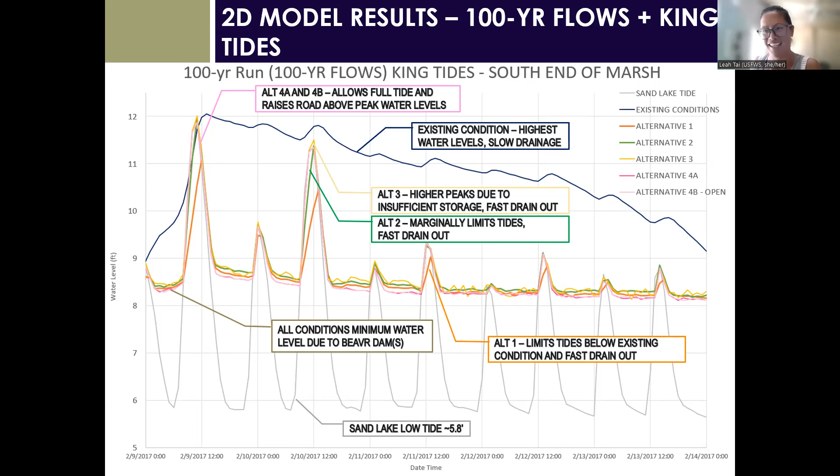That's a tough question to answer, and I think yes, you can see the differences in how it performs during a storm, and that's maybe the main point of how a non-setback dike alternative would function - you do get these peak tides, and you get them every time there is a high tide.

You're going to see that high tide at the south end of the marsh, and whether or not that's acceptable is not necessarily for me to answer, but just to say that the existing setback dike does limit those peak tides on a daily basis. So if the baseline for performance is that it needs to perform as good or better than the existing dike does, then there's no hiding that we would be seeing these higher peak water levels, short duration water levels.

Right, and I just mean it looked like you had some other ideas about protecting the private property, like raising some of their land. I was curious if there's other things we can do that aren't a setback dike to help protect the infrastructure so that we're not forced to have the setback dike option, but I didn't know if there was any other pieces to consider.

I just want to put that in folks' heads - I would like that to be a thought, to not leave alternative 4 behind yet, and think about what other creative solutions we could have to protect private infrastructure from tide peaks. Because I think not having a setback dike through the bottom of the marsh would be the desired kind of marsh restoration alternative, focused objective.

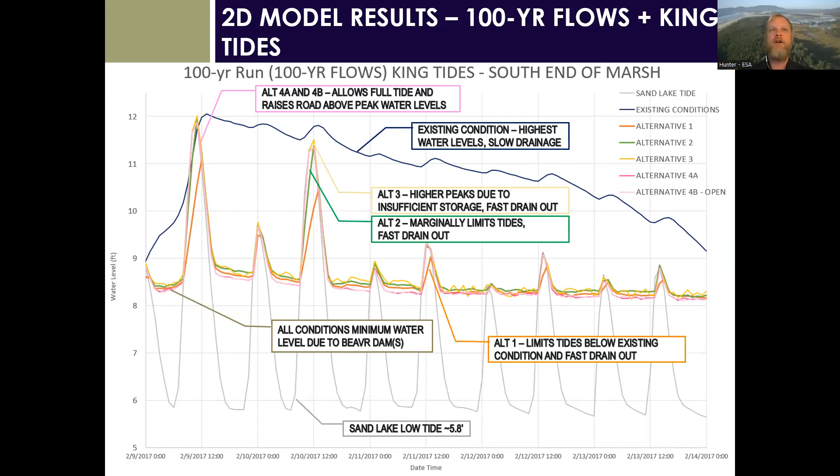But during what I'm calling the first storm, or these smaller events - actually more of a typical winter condition - what we're showing here for the existing setback dike performance, this was 2017. So now with the missing tide gate, the dark blue line would be getting about half a foot higher.

Not significantly different, and again, only really important when there's not a big storm taking place. So I'm confident in the choice to have used the 2017 data specifically for the storm event modeling. Does that answer your question, Malia? Yeah, you answered my question - I was just curious what your modeling was based on.

I just needed to know it was the 2017 water level data. Thanks. Yeah, and again, this is 2017 pure data of tide levels and water levels observed in the marsh, with the model calibrated to those levels. But when we developed the extreme events, we did a lot more as far as scaling flows and applying precipitation to generate them. So it's synthetic data for the extreme events.

Cami. Great, I was just going to emphasize Leah's point. Could you go to - I guess it's a couple slides before this - where you have the... okay, that's fine.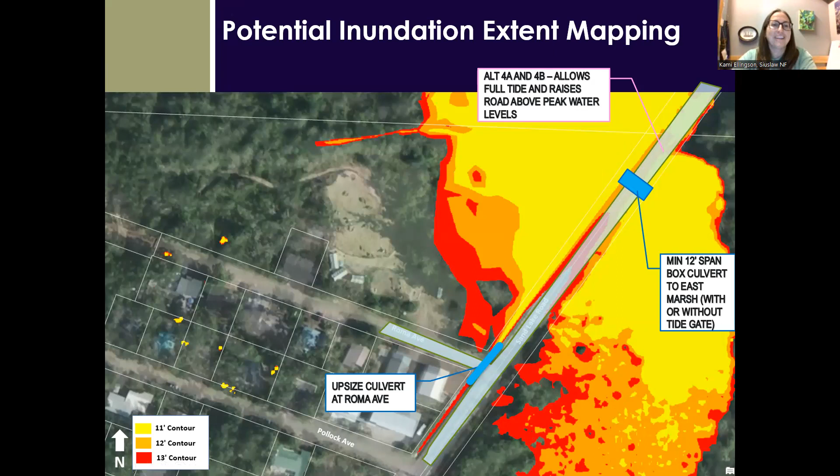You also have one with the - so just to broaden that discussion on the setback levee, oftentimes when those are constructed, especially because of all the things you've already listed, Hunter, with maintaining those and what to set the level at, and ongoing subsidence behind the dike, you're chasing the elevations of what's going to drain the area.

You built the setback dike to protect, and then just the other factors that start to play in. The maintenance is significant, and I want to emphasize the king tides. Yes, you said water levels would be significant during those big events, but I want to emphasize the short duration of that water.

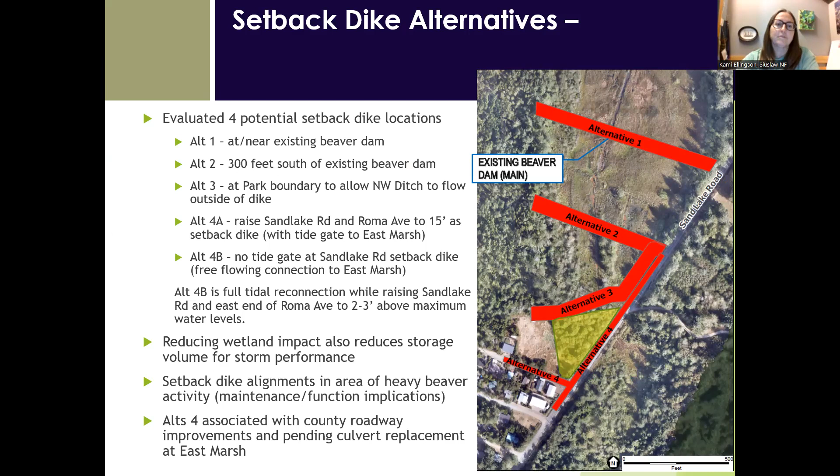As opposed to when you build a setback dike, and if you're running into issues with either the level of the tide gate, the subsidence of the ground, beavers, or issues with maintenance of that drainage structure within the setback levee - so the alternative to raise or do other protections for that private land to offset chasing those long-term costs, and even the potential to hold water like a bathtub behind your setback levee, which of course you want to avoid to protect the private properties to begin with. So I just wanted to expand on that.

Yeah, and to kind of drive some of that home as well, talking with the folks managing this tide gate at Smuggler's Slough, they've had issues where beavers blocked the tide gate to stay closed. So the tide gate was closed for a while.

They couldn't get it open, and they had to exhume it basically, dig it back out, get it to open, and now the tide gate doesn't close properly. So they're getting this flushing of flows through the tide gate that they intended to have close at certain times, but now it doesn't close effectively. So there are these differences between the idealized model where we're showing this culvert with full capacity - it closes perfectly, opens perfectly, drains out, has full capacity to drain out.

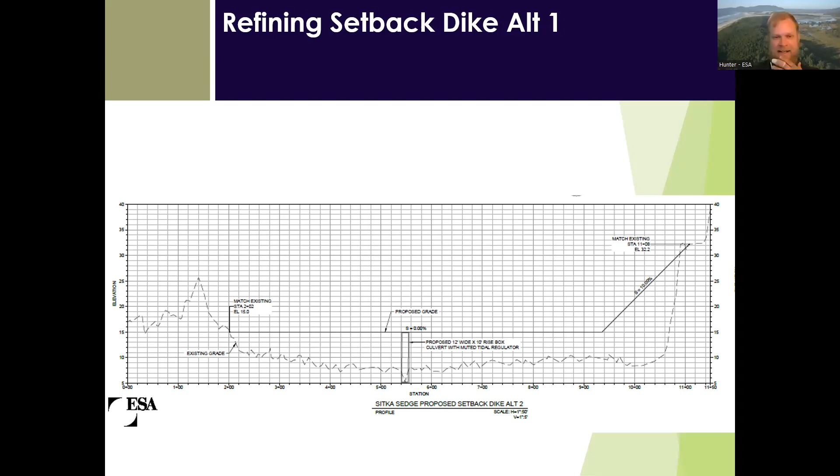Yeah, and there's a lot more details of logistics - tie-ins, geotechnical conditions, managing settlement, phased construction to manage that settlement, how much over-excavation and subgrade work would be needed to build a dike in this location, first of all. Because you're building on peat marsh - you're building on peat marsh. We've seen these sink, you know what it's like to have equipment out in these sites. You're building it on pudding, basically, and it can be very challenging. Then how much are you impacting that wetland surface to construct the setback levee? And then is it going to be maintainable and sustainable and provide ultimately what you constructed it to provide?

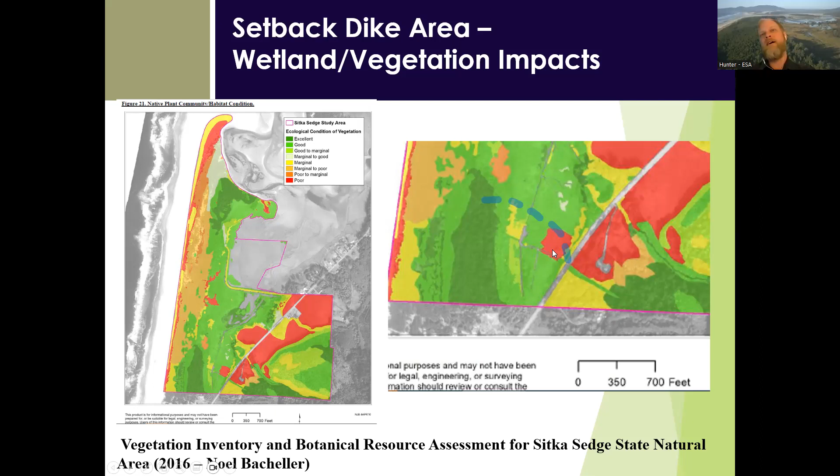This would be the tie-in location, roughly on the west side, tying into this forested dune over there - this is Malia actually in the center of the photo. What are we cutting through, I guess, is another question to evaluate and answer here - what are the plant communities, or what's the impact to the marsh? Noel, referencing some of your previous vegetation mapping and predictions - a lot of the marsh is in really good condition as far as vegetation goes. There's particularly this pocket over here that has some reed canary grass in it and is maybe less pristine, or in less of a good condition. But that's another topic - what are you filling over? We're talking about an 80 foot, 80 to 100 foot wide berm.

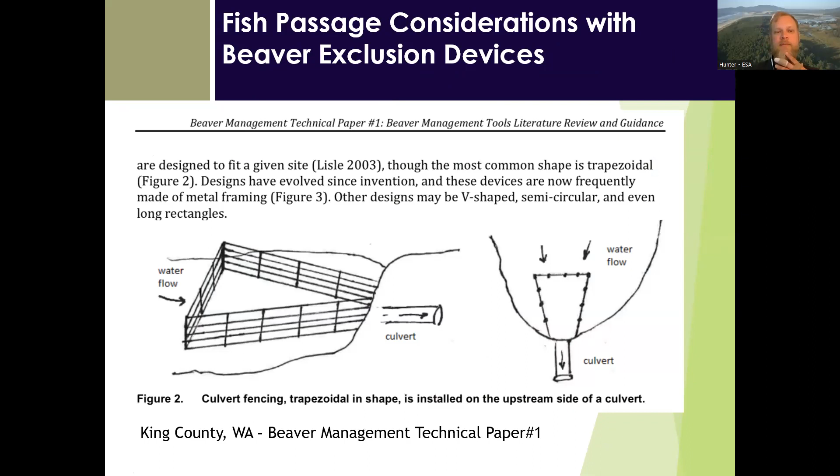Yeah, I think that certainly is what needs to be decided: are these various impacts acceptable? And then is the long-term maintenance needed to keep the system functioning also acceptable and going to happen?

Sorry, no, there's a couple more hands up. Jason?

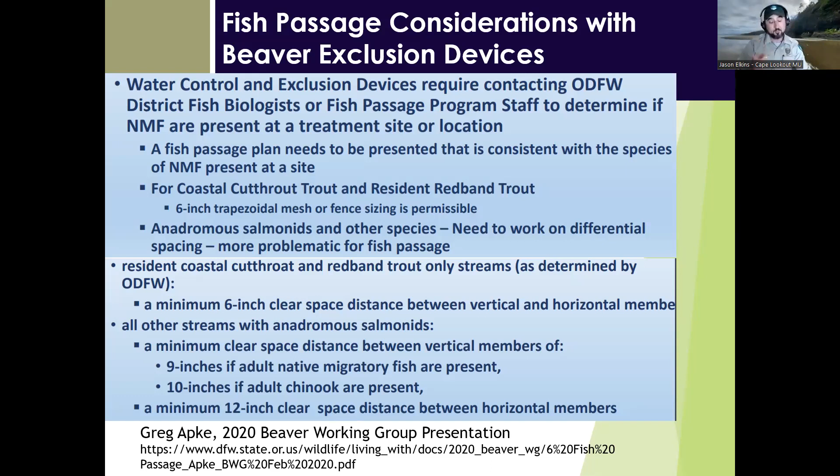Yeah, I just had a couple clarifying questions. I'm definitely not an expert, and with that possibly being on OPRD property, is that something the owning entity usually hires an outside firm or company to do long-term maintenance or operation of, or does it fall on the owning agency, relying on expertise from contractors for larger maintenance items?

Yeah, the long-term maintenance, as far as keeping things clear and clean and regular monitoring, more of the clearing blockages, that sort of thing, that certainly would be on the landowner where the structure is. As far as repair or replacement of the mechanical components or the tide gates, that would be a specialist contractor. And the regulator specifically is invented, patented, and typically installed by Nehalem Marine Manufacturing.

Long-term maintenance reportedly is quite low when things are functioning well. But just hearing about the Smuggler Slough tide gate system on the Lummi Nation that is kind of similar to this in that it's set very high, mostly staying open and only closing when the highest tides are reached. It's in a location of beaver activity, and it has had siltation issues and beaver clogging and stuff like that.

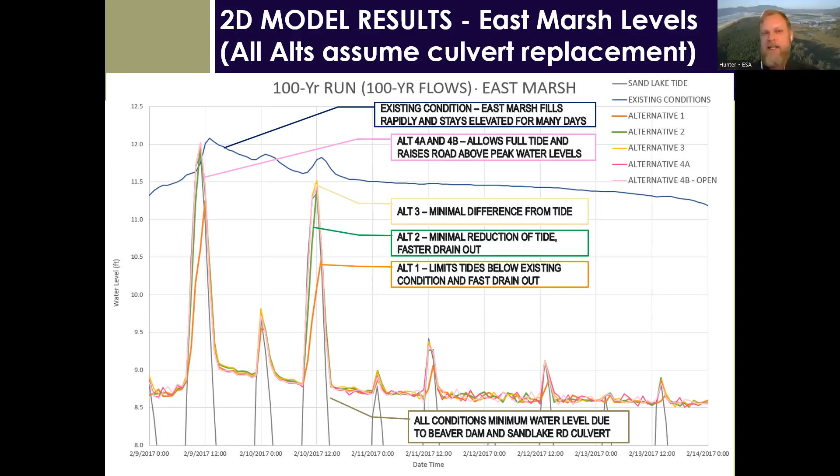Malia? Yeah, I'm just trying to sit here and brainstorm on things.

But first, I'd like to respond. Leah had put a comment in about possibly talking to the landowners to see if they would be willing to take on their property being infrequently flooded. I think that's an option we should consider and follow through.

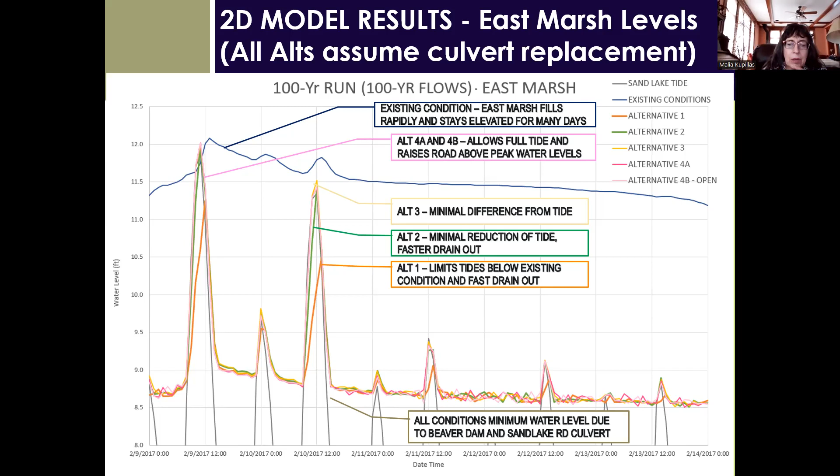Now that we know we only need to breach the dike 100 feet, and the biggest issue to Tierra del Mar is this 100-year peak combination storm, my question is how many muted tide gates would we need to put in across the existing dike to give us our 100-foot opening, where the tide gates would only close when we're approaching the 11-foot mark. Basically this would be a way of breaching the dike, allowing it to be open and functioning almost all the time as an open estuary, but with the safeguard of the muted tide gates closing at the higher elevation.

And I'm thinking if we're setting up at the existing dike, we're far enough away from the beaver activity that keeping it open would encourage the beavers to stay at the south end and away from this north end, reducing tide gate maintenance and fighting beavers. It's just a thought.

Yeah, so similar to the alternative investigated in the previous phase of replacing the existing tide gate with a new, modern tide gate system. There's some rehashing of previous decisions taking place here, but I think there were a number of reasons why the new tide gate option wasn't selected as the preferred alternative.

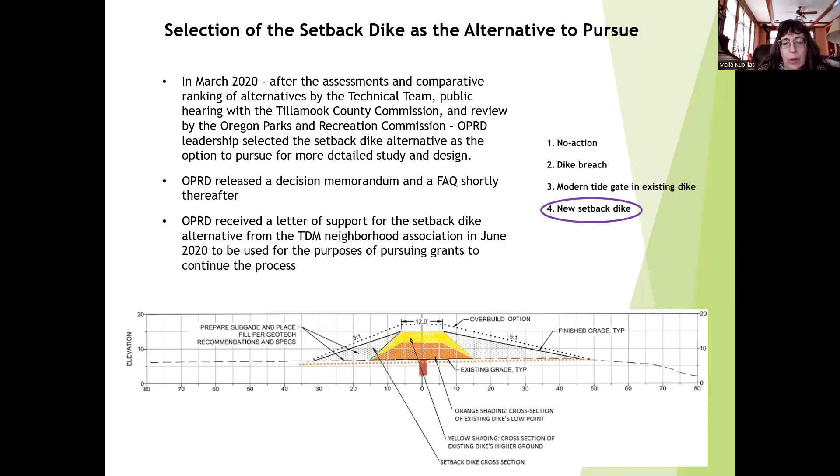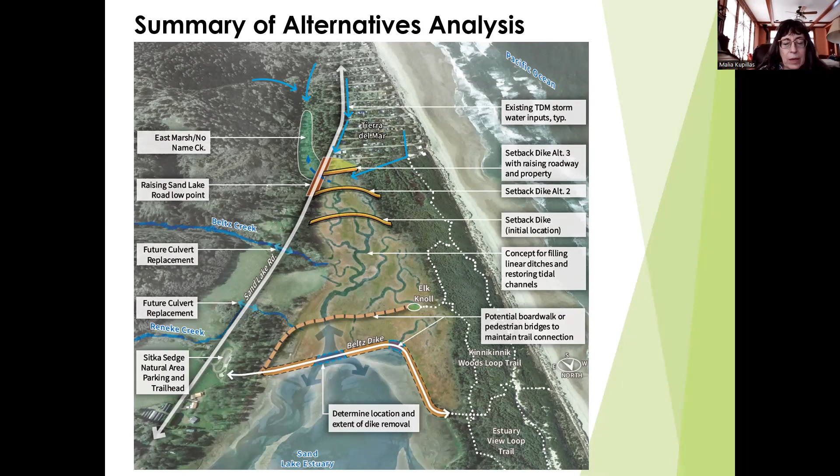Here's what I see from an environmental perspective. I see the beavers as being our best friends for creating the maximum fish habitat and the varying salinities of water that we're going to need out here. I'm also trying to protect Tierra del Mar. I have a feeling the owners of the land in Tierra del Mar are going to come back and say they don't want to be impacted more frequently by these tide floods. Is there a way we can find a balance to avoid doing one of these alternative dikes, which seems more damaging to everything going on back there? I'm just trying to figure out a way to make the system function and evolve the way it wants to, with the least amount of impact.

Hunter, can you speak to the requirement to upgrade the structure, the profile of the dike? I think that came from modern FEMA standards - wasn't that the case? And would FEMA standards apply in this situation?

Yeah, it's really more of modern geotechnical design and less than FEMA. I guess I would be leaning more on Army Corps standards for levee construction. So the flatter side slopes, 3-to-1 side slopes, are more typical or acceptable under modern design criteria. You see some locations - the location of the existing culvert is one of the worst, where we have seen a lot of erosion and very steep banks. Even on the inside, the scour, the eddy, the scour taking place there is really narrowing this dike. Not only that, but our geotech was just out there recently, pointing out some of the trees on the dike that have a lean to them, have the potential to fall over and create a pretty big hole.

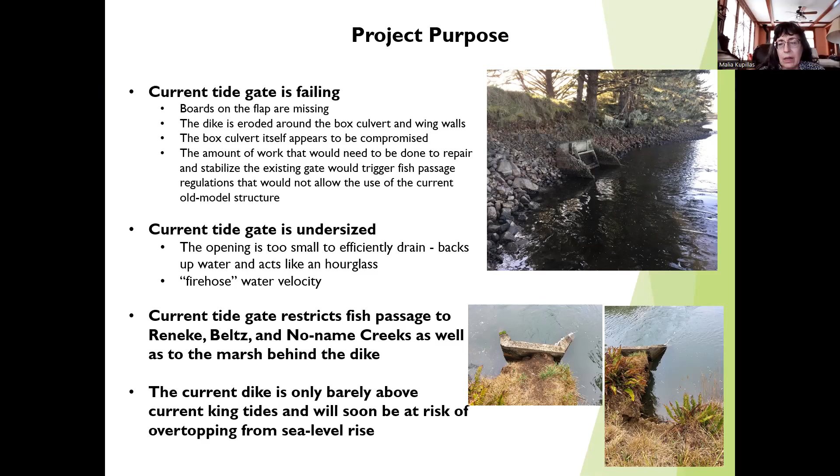But I'm talking about, forget where the current tide gate is, I mean it's horrible. I'm talking about going back to breaching the dike 100 feet there, and coming in and putting, maybe it would take a series of 3 tide gates, I don't know how many it takes to span 100 feet where the main channel is, so we've got that opening. And then we just have the ability on rare occasions to close them.

So they wouldn't be opening and closing all the time. And yeah, if necessary, would have to upgrade. I'm accepting that we're going to have to upgrade at least part of this tide gate to some extent - or I mean not tide gate, but the dike.

Well, just for reference, the typical tide gate doors are about 10 feet wide. They do make larger ones, but my understanding is the most widely used and reliable version is about 10 feet wide, so an equivalent span width would essentially be 10 gates wide. To bring it back to cost - not that we're talking about a lot of expensive things here - but tide gates of that scale, I don't know of any, but some that are maybe half or a third of that size, we're talking about a $3 million structure probably. For something that size, 10 gates, I'm totally guessing at this point, but a $5 million structure, something like that.